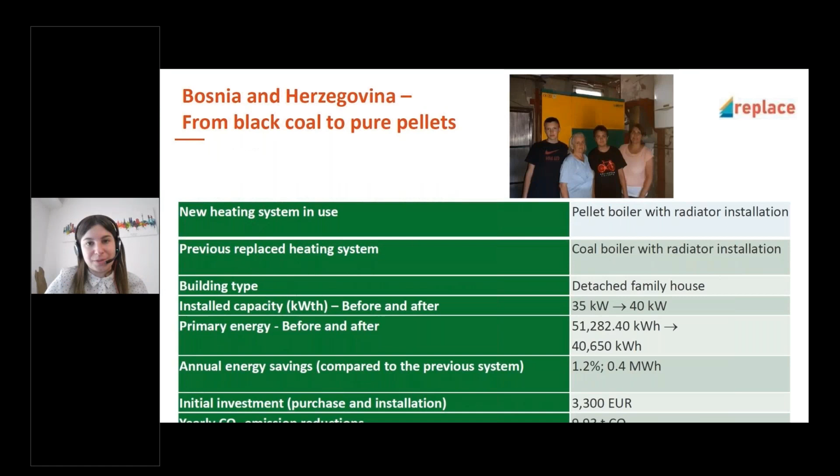Our editorial work is organized around a topic of the month, which allows us to dig deeper into specific themes. Each month, several items are produced by Build Up, such as overview and technical articles, written interviews, and much more. Build Up also offers the opportunity to host webinars on topics related to energy efficiency in buildings. More recently, Build Up has opened its doors to distinguished experts in the field to share their knowledge in front of our cameras in our Build Up expert talks.

The Build Up portal shares daily the most relevant events in the field of energy efficiency, but we also participate actively in many European events around the year, such as EPB Center and REHVA conferences, Horizon 2020, Interreg and Cost Action events, Covenant of Mayors, and more, always with the aim of further disseminating the results and helping to create high-quality media content. The Build Up portal is updated daily, reaching around 120 new items each month, including news, events, publications, articles, and video content.

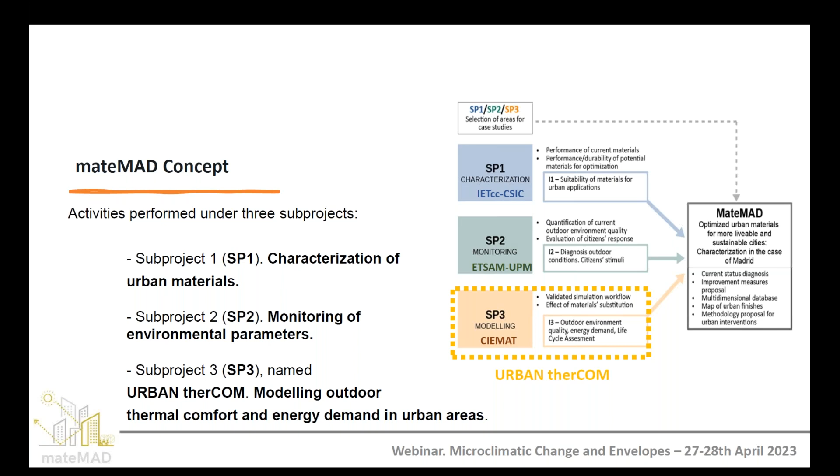They are leading the monitoring of the environmental parameters. And then the last one, the one that I lead, Urban therCOM, is related to the modeling part of the project. The project activities are divided into 5 big steps.

The first step is related to the assessment of vulnerability within the city of Madrid, related to topics related to climate change. The second step is related to characterization of thermo-optical properties of different kinds of material, both in situ and in laboratory. The third step is related to the monitoring of the case study that we chose.

The fourth one is related to the modeling strategy to be able to model and simulate both indoor and outdoor comfort. The last step is related to optimization of the results, and in this we want to use life cycle assessment methodology, and this part is also led by CIEMAT.

At this point of the project, related to the simulation part, we have already chosen our case studies within Madrid based on the energy poverty index, urban heat island intensity, and the morphology of the cities. The first part related to vulnerability within the city is carried out by Instituto Eduardo Torroja, and the last part related to morphology was led by CIEMAT using the homogeneous urban zone methodology.

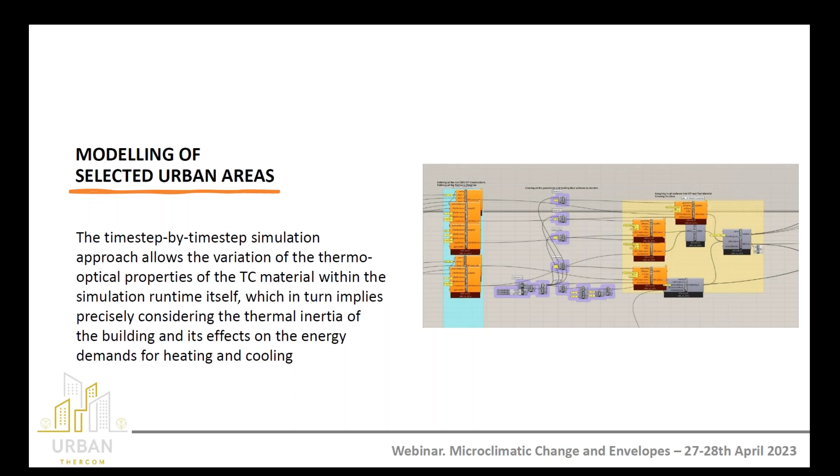Related to the concrete simulation part, we designed a simulation methodology based on a Grasshopper digital workflow. At the moment, we are still at the beginning, and we have only made some simulations related to thermochromic coating in a really simple test room, basically in Madrid, of course.

The further steps are related to the integration of the environmental part, the building part, and the material into a unique workflow. In this sense, we have the help of Emanuele Naboni and his PhD student Marcello Turrini, who are also part of our work team, and they are helping us develop this big digital workflow.

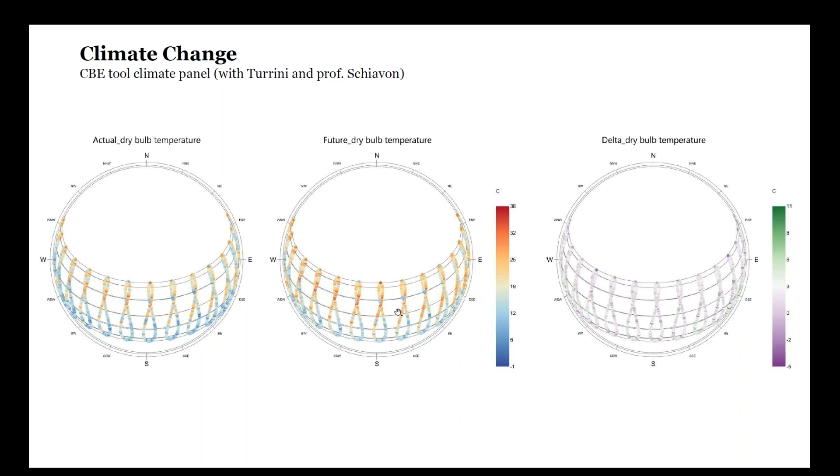Another factor is that the frequency of temperature during the year is changing. This is a chart for the city of Berkeley, where we see that we have a much higher number of occurrences at higher temperature. This means profound changes in terms of microclimate. But also, if we think of an indoor space, this chart exemplifies how there is a shift from an acceptable temperature to a hot temperature, as well as a shift along the year from a hot temperature to a very hot type of temperature.

So this means, in a way, there's a need to design new tension between what happens outdoors and what happens indoors.

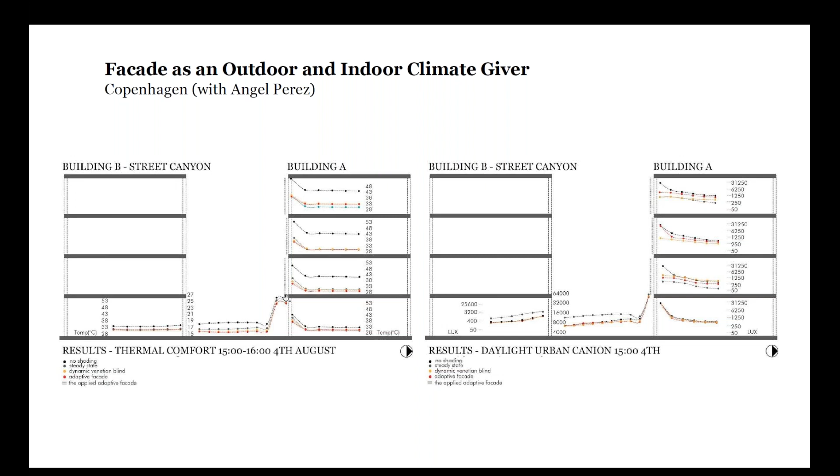With certain designs, we are able to control emissivity and reflectivity, and this is perhaps most of the research I'm conducting now in Sydney with Professor Santamouris. We are able to actually modify conditions at different scales.

Further research showed us that just by changing simple properties of the envelope, we are able to influence indoor-outdoor temperature by up to 4 degrees, if you look at the right chart.

There is a strong emphasis in this workshop, as well as in design, on the computation methods behind it. We have now developed, with some of the presenters, an interesting workflow that allows us to branch all the physical happenings, and it's a very interesting phase.

We are able to assemble different scripts and understand a physical problem, and understand how our design is able to have this double impact on the indoor and the outdoor.

We just finished, along with Emanuela and Marcello Turrini, a workshop of a few days where we had a very interesting group of students, expert students from ICOM and different practitioners from Europe, as well as from different universities.

All of them were then able to design different types of envelopes and understand, almost in real time, the implication on the energy demand for the building, the indoor comfort, as well as the design for the outdoor.

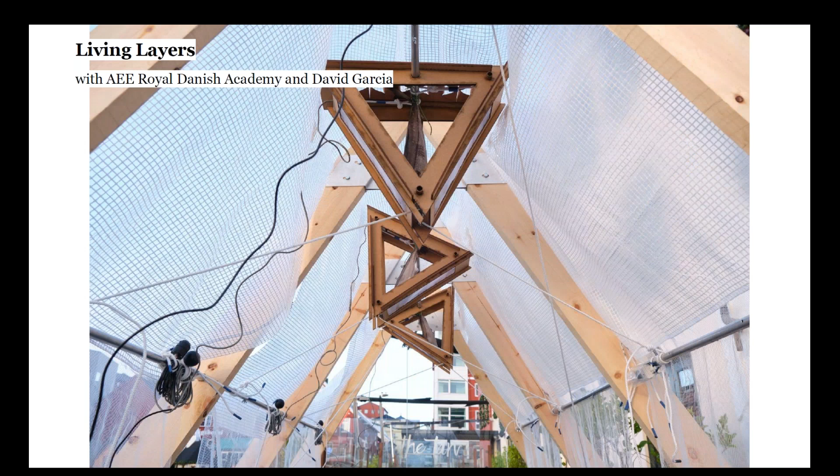Also very interesting is the idea of involved flows related to the culture of a place, like in the Faroe Islands, where together with a student, Jonathan, the idea is to use fish that are drying throughout this facility as an element that modifies the hygroscopic condition within a space.

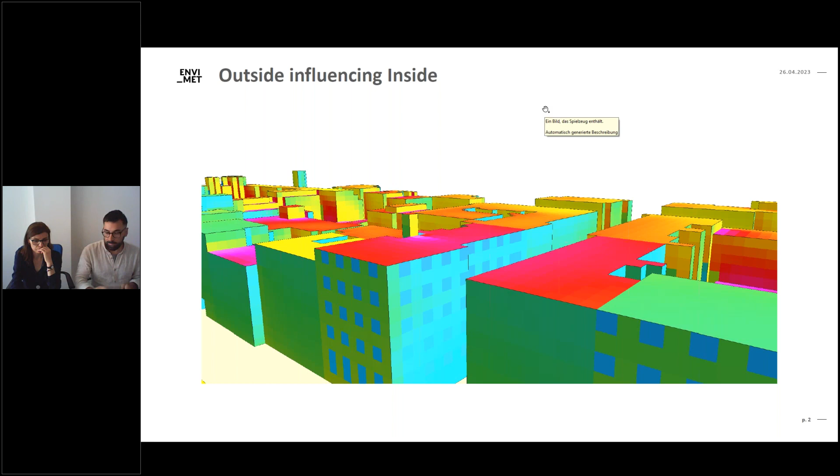So when we think about modeling, we also have to think about the practicality of modeling. It's easy to build a huge model that has everything inside of it, but in the end nobody can use it, or you need a supercomputer to handle that. So that doesn't bring us much benefit except being in a scientific paper research competition.

So I think these things are pretty obvious, and it's just the same principle, just showing the facade elements.

So I picked two other aspects. When we work on projects or think about architecture, we often have the problem of ambiguous spaces, transition spaces. It's not really clear: is it an indoor space or an outdoor space? It has the characteristics of an outdoor space, but at the same time it is largely influenced by building materials or urban elements, for example a football stadium. Inside that stadium, we are somewhere in between an indoor space and an outdoor space.

So to evaluate the microclimate conditions that actually take place, for example inside such a soccer stadium, we have to use both approaches. We have to use approaches from building physics on the one side, and approaches from boundary layer meteorology on the other. The final result will be a mixture between the two. Nobody can say at the beginning what percentage will be indoor characteristics and what percentage outdoor characteristics. And we obviously do not need to say this at the beginning, because we have the possibility to model this.

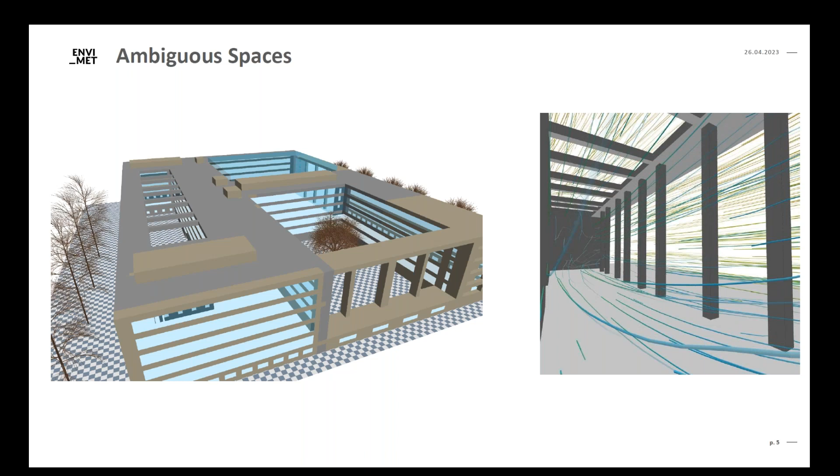Another aspect, which I think is quite crucial and has not been handled very much because it's not really climatology: when we talk about green infrastructure, we talk about the value of properties. It's also the question of what we see from the outside, from inside the building. What is the window view? Green infrastructure is nice if we are outside seeing it, but most of the time, at least in the countries most of us come from, we are inside the building. So green infrastructure also needs to work from the inside view. It's good to know what fraction of green space I see if I look out of my window, especially with classical windows which do not span the complete facade.

So this is also a very interesting analysis point of view, maybe a bit outside the climate aspect, but we are in a holistic approach, so we have to consider everything. We cannot just look at the microclimate. We also have to look at the impact on rainwater drainage, the effect on traffic flows, and so on. To provide a realistic redesign or a realistic idea of climate change mitigation, all these aspects have to be considered. Even though we are climatologists by profession, we cannot just start designing something and then come into the architectural or community process and see it doesn't work because there are trees where cars need to go.

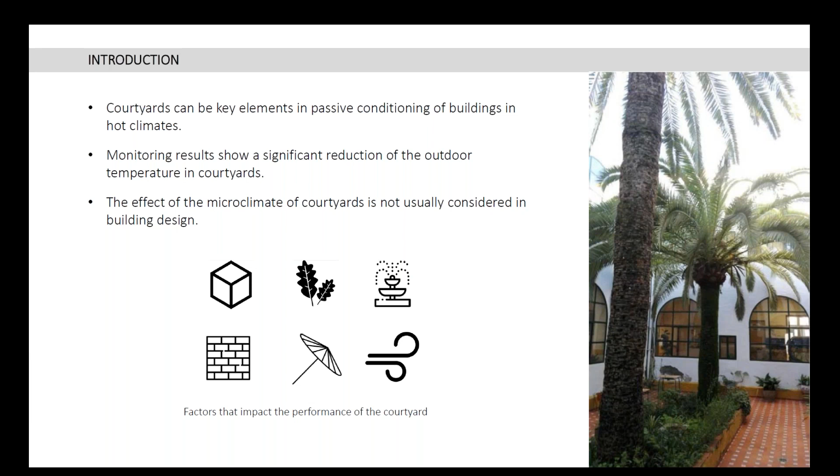We have performed many monitoring campaigns. For example, in this study, we analyzed up to 20 courtyards in the Mediterranean climate in different cities, and all of them achieved a tempering performance. I mean, they were able to have a thermal gap, or the difference between the outdoor temperature and the courtyard temperature, up to 10 degrees. But the performance was different by up to 8.5 degrees between some of them. The best performance was achieved by the deepest courtyard during the day, but during the night they also had some overheating effect.

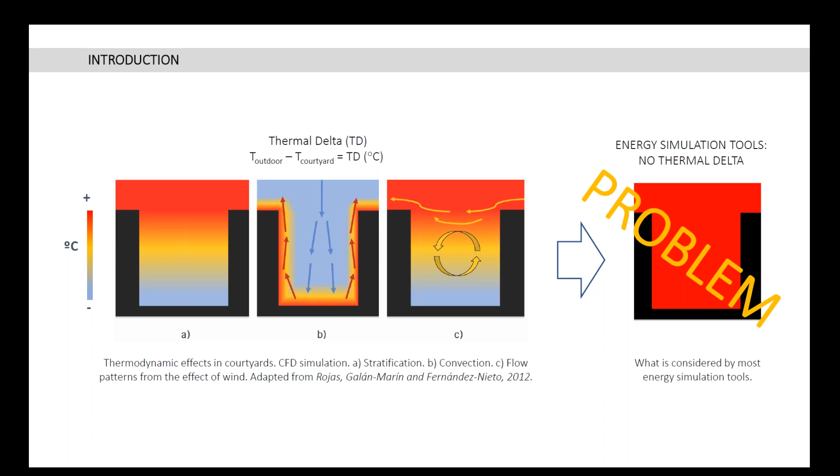However, my PhD thesis was focused on the simulation of these spaces, because we know that the thermodynamic effects inside the courtyard produce this stratification and this lower temperature in the lower levels. But when we simulate them with traditional tools, they consider that the courtyard temperature is the same as outside, and this is not true. And this is a problem because we cannot account for the benefit of these spaces. We performed some simulations and some studies to quantify this effect.

For example, in this one, in collaboration with Jesus Lizana, who is presenting tomorrow too, we simulated a building with a courtyard using different outdoor temperatures: the typical year, the rural weather file, a local climate zone outdoor condition monitored by us, and also considering or not the courtyard. And we found important differences in the number of discomfort hours that we achieved.

If we only consider the local climate zone, there was the highest number of discomfort hours, but considering the courtyard microclimate, we could reduce especially the extreme discomfort hours in an important way. So the consideration of the courtyard is important.

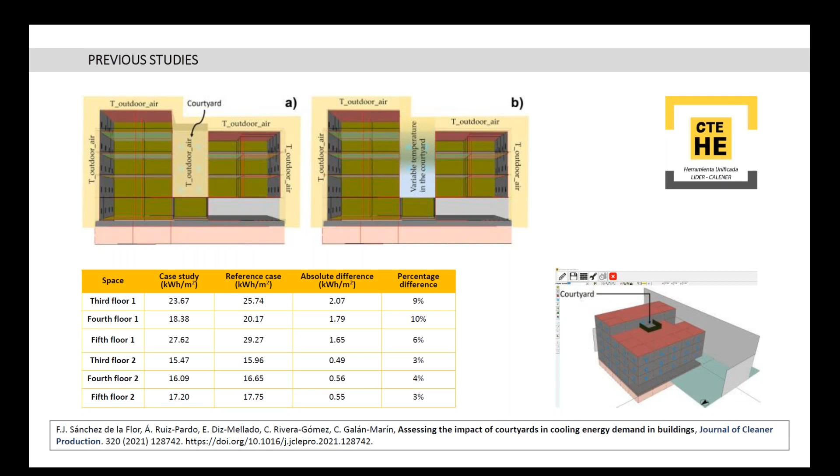This is another study, in this case using the tool that the Spanish government provides for the energy certification of buildings. And we also measured the reduction in the energy demand with a percentage difference up to 10% at the lower levels, where the courtyard has the lowest temperatures.

We also extrapolated the potential of the courtyard at the city scale, using the cooling degree days methodology to quantify the potential of using a shading strategy in courtyards in a city like Cordoba, which is the city with the highest amount of courtyards in Spain, and the reduction could be up to 30% in energy demand in 69% of the urban plots.

But this is all about monitoring, and we want to focus on the simulation of the courtyard. So we have tried different tools in this study. This is an old study from 5 years ago using ENVI-met, and we found that the software was able to simulate the tempering effect, but not with such high accuracy as we would have wanted. I know that with these new releases, probably these results are going to be better.

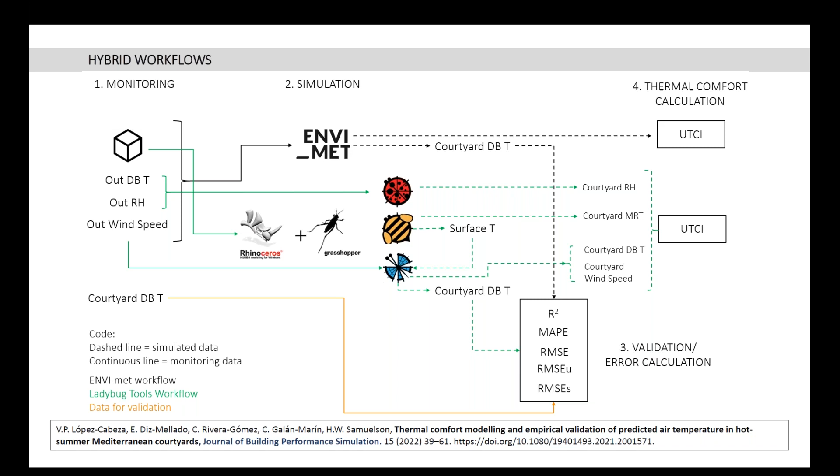But we also tried other hybrid workflows, using the Ladybug tools with the CFD plugin that they have, the Butterfly plugin. And using this workflow, we simulated the performance of different courtyards, and we were able to achieve faster and more accurate results.

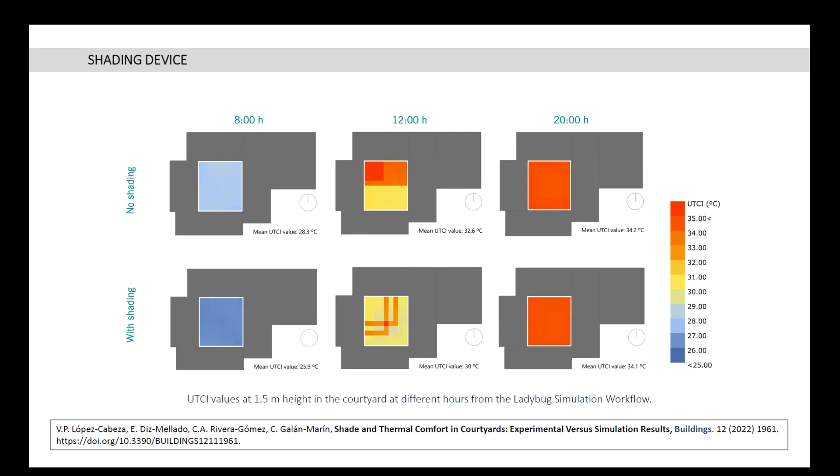Using that workflow, we analyzed different strategies to improve the performance of the courtyard. For example, in this case study, we simulated a courtyard with and without a shading device, and we achieved an important improvement in the UTCI index in the courtyard, especially when the sun was high, with a larger area at lower levels of UTCI.

We also simulated the effect of thermal inertia and ventilation in the Solar Decathlon prototype for the European competition. In this case, we simulated 3 different levels of thermal inertia in the walls, from almost zero inertia with a PVC canvas, which is what was built, and then with 2 traditional walls in the courtyard. And we found that if the courtyard is closed with no ventilation, the higher the thermal inertia, the better the results at the time when the temperature is higher during the day. But during the night, it had an overheating effect.

But if we open the courtyard, the ventilation and the outdoor air that is coming in is evening out the results from all the walls, which means that we can combine thermal inertia with ventilation in order to optimize the results.

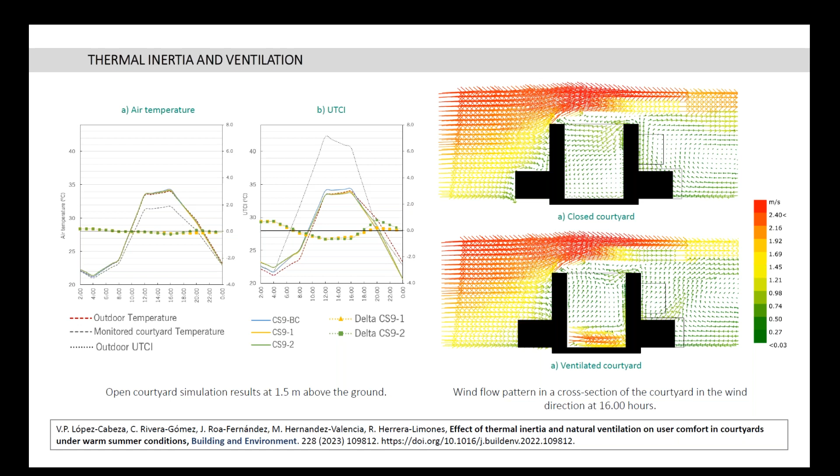Finally, I'm going to show you some coupling tests that we have done using the building energy simulation tool that Spain provides, in order to make this methodology accessible to professionals, with the simulation of the courtyard, coupling the Ladybug workflow with the HULC tool.

This has been done in the Rhinoceros and Grasshopper interface, with some blocks of Python code in order to link first the geometry of the building to be able to export it easily, and then to analyze the climate to find the times when we want to simulate the courtyard, because we need to reduce the CFD simulation time in order to couple one tool with the other.

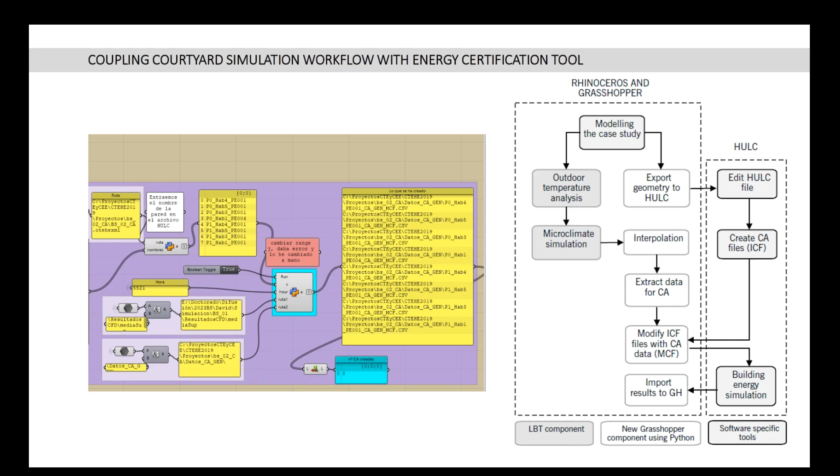And then we simulate the courtyard and we export the courtyard temperature using Python code to generate all the files that the software needs to change the boundary conditions of the elements facing the courtyard. And these are some of the preliminary results of this test, where you can see that the temperature in the rooms facing the courtyard changes a lot when we consider the benefit of the courtyard.

Also, the energy transmitted by the walls and windows facing the courtyard changes in a huge proportion. So just to conclude, we find that the microclimates generated in outdoor spaces of buildings like these courtyards influence in an important way the energy demand and thermal comfort of users. And we need to design and test different simulation workflows in order to account for their benefit.

We are also working on the accessibility of the professional sector to these methodologies in order to promote climate change adaptation of the built environment. And I have shown you some CFD and BES hybrid simulation workflow. We are still working on that, but we could account for or quantify the benefit of the microclimate of the courtyard.

And we have some future works, but Professor Carmen Galan is going to show you later some of the ongoing projects that we already have. Thank you very much. If you have questions, that is my email.

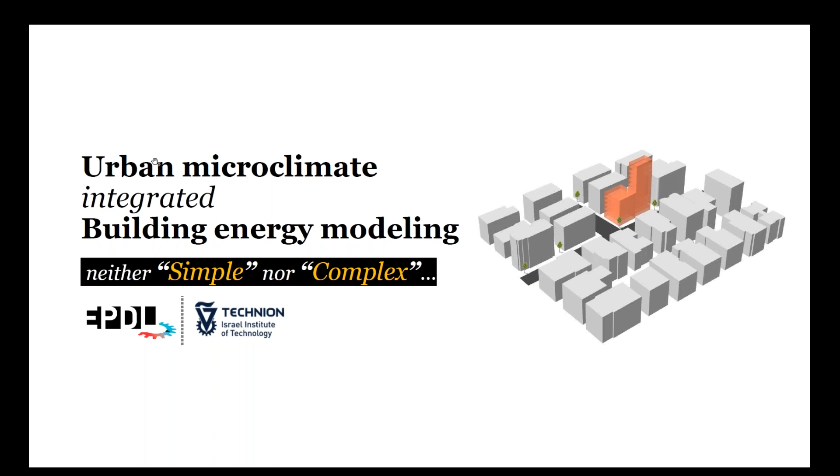Hello everyone, I'm Naga, PhD scholar in the Environmental Performance and Design Lab at Technion Israel Institute of Technology. Since October 2022, I have been working on the topic of Urban Microclimate Integrated Building Energy Modeling, supervised by Professor Jonathan Nathaniel. Today I'm here to discuss my perspective on how integrated simulation is neither simple nor complex with available know-how.

So in this presentation, I would like to answer the questions: why is integrated simulation required? What are the methods available for integration? And how are integration approaches neither simple nor complex?

So we all know that cities have a major stake in world energy consumption, of which 30% accounts for building operational energy use. As most energy generation is fossil fuel reliant, reports on rapid urbanization and global warming are raising concerns about future greenhouse gas emissions.

All thanks to building energy modeling tools that allow designers to make informed decisions pertaining to building geometry, envelope, appliances, equipment, and automation controls that promote energy conservation and renewable energy generation without compromising visual and thermal comfort criteria, using typical climatic conditions.

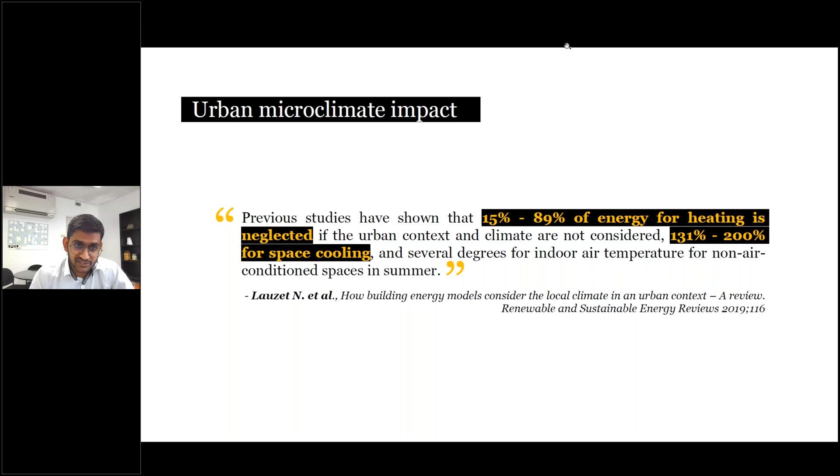After an extensive literature review, we classified integration approaches into two categories based on the microclimate data used for simulation: representative and surface-specific data methods. How do they differ?

In a representative data-based approach, point location or averaged urban microclimate data, generated either from monitoring or from urban climate model simulation, is used to replace data in weather files used for building energy simulation.

But this method raises serious scientific questions, like which point or points of data represent the microclimate surrounding the building. Can the representative data in the weather file help building energy modeling tools account for varying heat flux around the building? To get answers to these questions, we need to take a few steps back and understand the building heat transfer mechanism in an urban context.

We all know that convection, radiation, and discharge are three key modes of heat transfer in buildings. Discharge heat transfer includes air-to-air heat transfer between indoors and outdoors through ventilation and infiltration. According to previous studies, wind speed changes with building and contextual urban form.

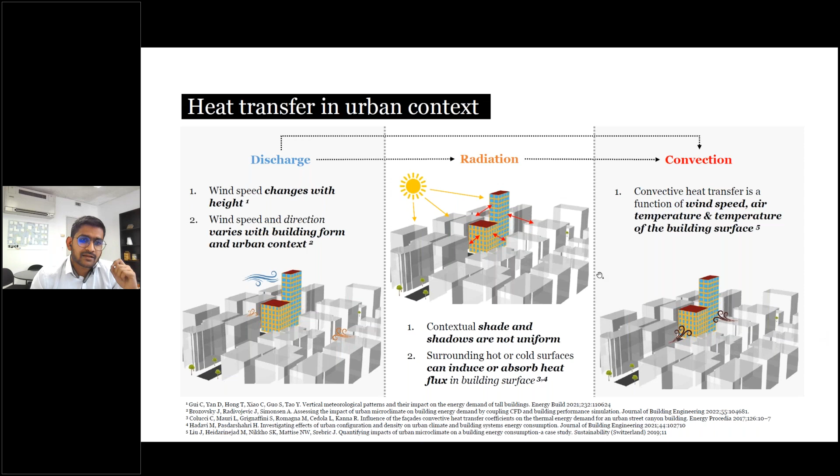Almost all building energy modeling tools that use single weather files for building energy simulations compute heat transfer based on few assumptions. For example, Energy Plus accounts for long wave radiation exchange by assuming that ground surface temperature is equivalent to air temperature. But the ground may be paved with concrete, bitumen, or grass in an urban context. Now, theoretically speaking, can the surface temperature be equal to air temperature?

In the case of local outdoor air temperature, a constant gradient is used to compute height-wise air temperature from the dry bulb temperature in a typical weather file. Similarly, even wind speed for a specific altitude is extrapolated from a representative climate data point. In an urban environment, a microclimate is highly variable, not just with height, but also based on the point in location, as Professor Bruce has discussed before.

So surface-specific microclimate data makes more scientific sense. Urban climate modeling tools are integrated with building energy modeling tools in various methods, where climate variables and heat transfer coefficients are computed and then transferred to the building energy model at each step of simulation. This kind of integrated co-simulation of urban climate models along with building energy modeling tools is termed coupling or chaining, which Victoria has also discussed in her presentation.

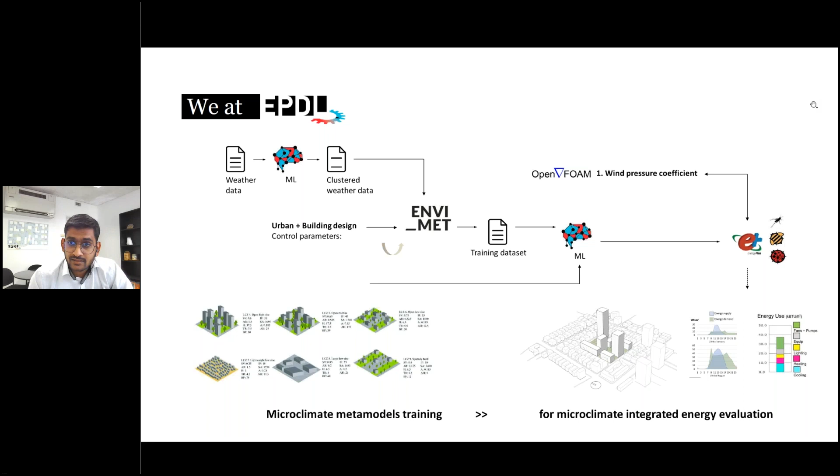Thank you so much, Naga. So we have had a very interesting first session.

To make a resume, Michael and Bruce spoke and introduced the topic, creating this important design tension between climate balance, energy balance, and people's physiological balance. This positive tension was then taken up by Victoria, who discussed specifically how a typical typology such as the courtyard may vary its performance according to geometrical factors as well as envelope factors.

She also discussed how this outdoor room, which is anyway an inner room with respect to the city, is linked to the very indoor space of the building that wraps the courtyard. This tension was said to be understudied, so some of that research that involves the envelope was considered.

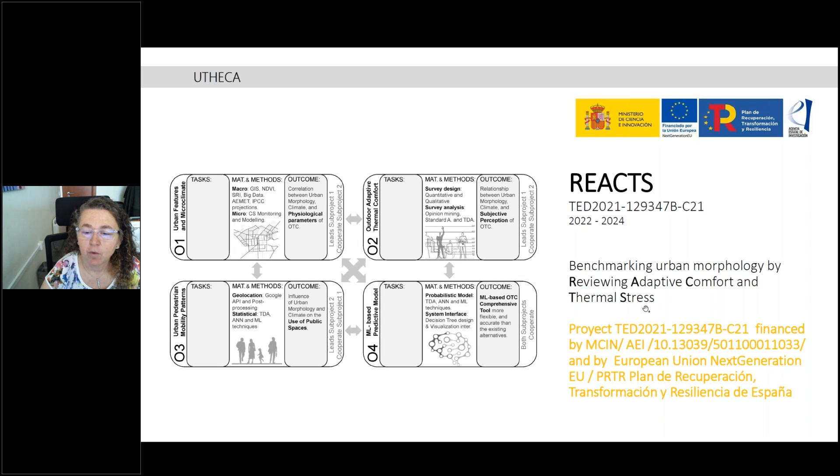Now, in the research group, we are focusing on projects that could address this type of event. The first one, REACTS, is financed by the Ministry of Science in Spain and also by European Union Next Generation funds. It's about benchmarking urban morphology by reviewing adaptive comfort and thermal stress. This project is coordinated with UTHECA, which, as Emanuele explained at the beginning, is a way of doing national projects here in Spain. UTHECA is basically a group of mathematicians from the University of Valencia, developing a machine learning based forecasting model for integrated assessment of thermal resilience using urban thermal comfort algorithms.

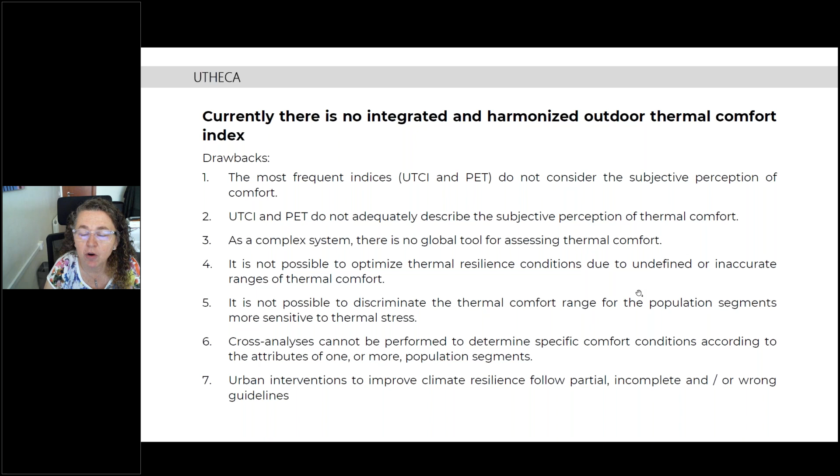The idea is that we do not currently have a harmonized outdoor thermal comfort index, because the most frequent ones do not consider the subjective perception of comfort. So they do not adequately describe users' perception of comfort, because it's a complex system. There is no global tool at the moment to assess thermal comfort, and as a consequence it's not possible to optimize thermal resilience conditions, nor to discriminate thermal comfort ranges for population segments more sensitive to thermal stress. Cross-analysis also cannot be performed to determine specific comfort conditions for one or more population segments. As a result, urban interventions made by architects to improve climate resilience are currently following partial or even wrong guidelines.

So the idea is to join on one side microclimatic components, as already mentioned: solar radiation, mean radiant temperature, air temperature, wind velocity, relative humidity—the ones already included in UTCI or PET—plus urban components like geometry, orientation, albedo, reflectance, and vegetation, and personal components like gender, age, health, expectation, experience, possibility of choice, or even time of exposure, as already mentioned by Michael in the first presentation.

Into an integrated outdoor thermal comfort algorithm that could be shown as a GIS-based integrated visualization tool. So the project aims to improve urban thermal resilience in this context of climate change, developing machine learning-based models that allow accurate prediction of the subjective perception of comfort and the interactions with the climate and built environment, in order to generate better intervention strategies oriented to adaptation and improvement of outdoor public spaces. Also, including sub-project 2, the one with the mathematicians, we will use topological data analysis for all the data input and management, allowing optimization of the model evaluation algorithms.

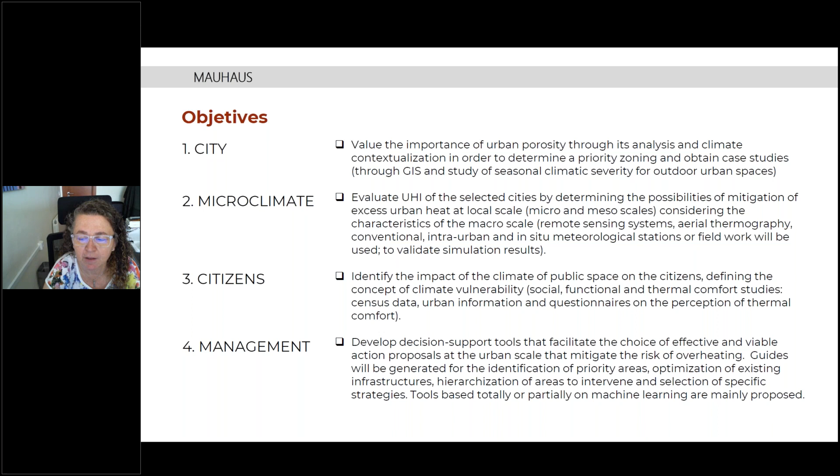On the citizen level, we want to identify the impact of climate on public space on citizens, defining the concept of vulnerability—social, functional, and through thermal comfort studies. At the management level, we want to develop decision support tools that facilitate the choice of effective and viable proposals at urban scale to mitigate the risk of overheating. We will generate guides for identifying priority areas and tools based, totally or at least partially, on machine learning.

So the methodology tries to face all four sides of the problem.

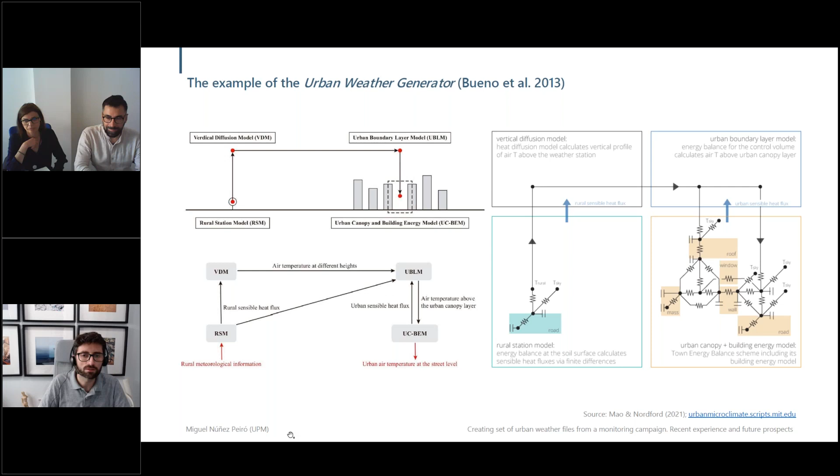Since extending the use of these weather files is critical, we decided to focus on creating a set of weather files representing the whole situation of the municipality of Madrid as a pilot, as a test, in order to check if this process could be replicated in other areas.

Instead of following the modeling approach based on numerical morphing, so instead of focusing on the modeling of the physical phenomena of the environment, we decided to follow empirical morphing. So forgetting somehow about the physical phenomena taking place, forgetting a little bit about the energy balance, etc., and focusing more on the inputs and outputs, on the boundary conditions that we have, and which outputs we were getting in the city, taking advantage of the power we have nowadays with artificial intelligence, with empirical modeling, to pursue that objective of creating weather files.

We focused basically on empirical morphing because we think access to data is increasing. We have not just information collected from the networks we deploy, but also a lot of information anytime, every day, with more accuracy and more definition, both in spatial and temporal scales. We also have much more access to land-based networks. We have improved the provision of metadata to better contextualize the data we collect at urban locations. We also have more information to correctly determine the source area of these measurement points and determine if they are representative of that urban environment, and improved quality assessment and quality controls beyond World Meteorological Organization recommendations, specifically for citizen weather stations.

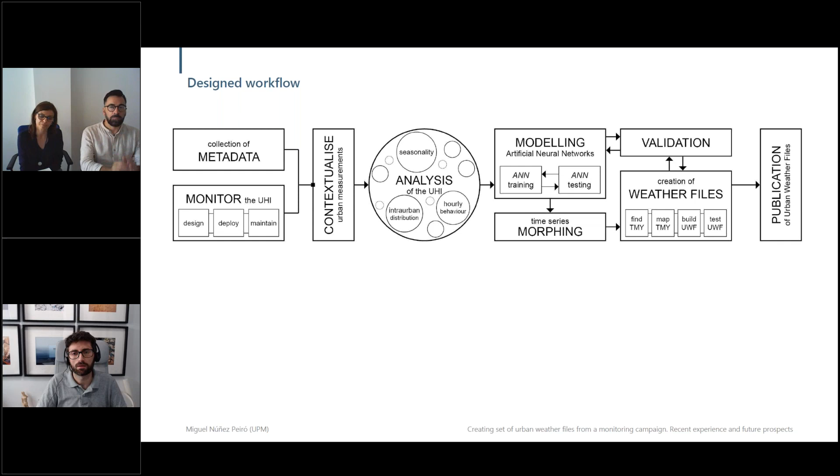So to summarize a little bit what we did: a couple of measurement campaigns. One focused on the spatial distribution of the urban heat island, through which we were able to identify the hotspots and the cold spots in the city. And then, thanks to that, deploy a fixed network of sensors across the city that were measuring and gathering data, temperature and relative humidity data, through a couple of years on an hourly basis.

With that information, analyzing it graphically and of course statistically, we got some insights on the urban heat island of Madrid, confirmed some of the previous trends that were highlighted by other colleagues, and also highlighted other patterns that we found out, such as the absence of a strong seasonality on the maximum and minimum daily intensities, and with that information, carried out the modeling of the conditions for each one of the measuring points.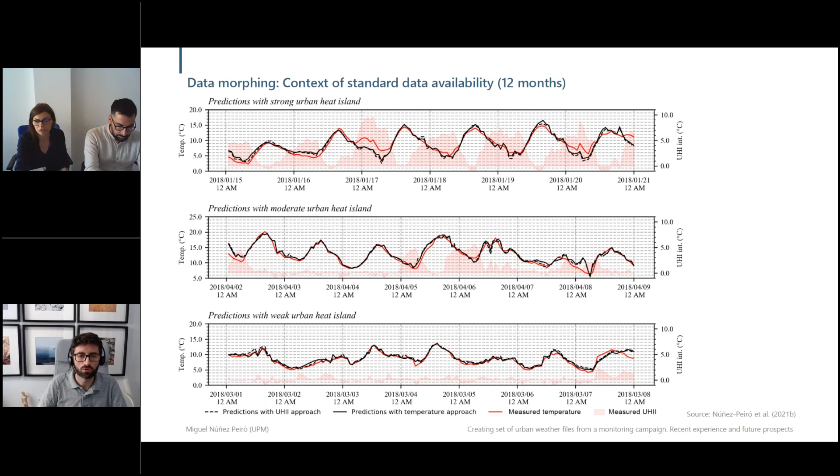So as I was saying, the idea was to morph the data. Here at the lower level, you can see that we got at the end a 10-year data set for each one of the urban stations that we had, and about 8.5 years came from this modeling approach. So at the end, we had an artificial time series of temperature and relative humidity that we could combine with complementary data coming from an official weather station located outside, and then extract from that time series the typical meteorological year following one of the procedures that we have available, in this case, the ISO standard 15927.

The result at the end was this one. We got to cluster the city of Madrid in different urban climatic zones, so to say, that we designed with the cooling degrees and the heating degrees distribution in the urban area, somehow similar to how the climatic zones are created at the national scale here in Spain, for example. The different climatic zones that we have are highly corresponding with the heating and cooling degree days.

And in a similar way as well, we created a set of weather files organized with these two axes, increasing in winter severity with the letters and increasing in summer severity with the numbers that you see here, in a very similar way as the technical code here in Spain, for example, does. The results that we obtained from this.

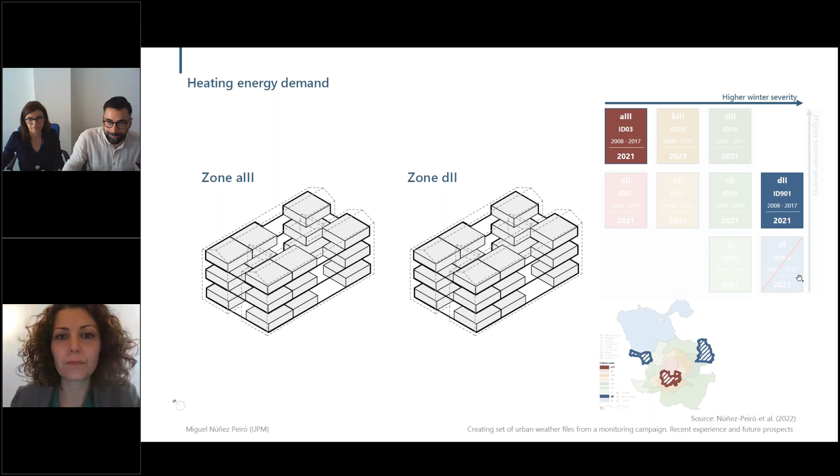So my short speech will be on the impact of reflective materials on outdoor and indoor microclimates, that I think is quite related to the topic of the European project and this session. So, sorry. Briefly, who am I?

I'm currently a lecturer at the Department of Architectural Technology at Polytechnic University of Catalonia, the School of Architecture. But I worked before in the UK at Brunel University, London, and I carried out a joint PhD program between Sapienza University in Rome and UPC. My PhD thesis dealt with the interrelationships between urban morphology, heat island intensity, and building energy use, basically in the Mediterranean context. So I analyzed Rome and Barcelona.

But I thought that for this webinar, it was interesting to present some results of another project I carried out in the UK at Brunel University, and the project was urban albedo computation in high latitude locations, an experimental approach. And the aim was to assess the impact of urban morphology and materials properties, more specifically solar reflectance, on overall urban albedo of urban textures, and how these affect outdoor thermal comfort and also building overheating risks, so outdoor and indoor impacts.

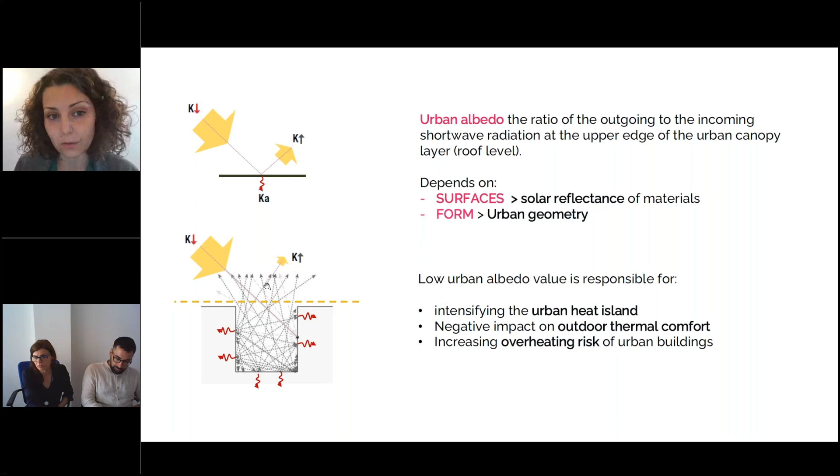Okay, and so the urban albedo is defined as the ratio of the outgoing to the incoming shortwave radiation at the upper edge of the urban canopy layer. So we analyze what happened in the urban canyon, so how the reflectances of facades and roads basically contribute to reflect solar radiation out of the canyons. And this, of course, involves both the property of the surfaces, roads and facades, but also the form, so the canyon geometry. And this is important because we know that lower values of urban albedo have impact on the heat island effect, outdoor thermal comfort, and indoor thermal comfort or overheating risk.

My specific task in this project was the modeling task, and so an assessment of different scenarios with varying values of solar reflectances of facades and roads, and the impact on indoor operative temperatures and outdoor mean radiant temperature, air temperature, so the variables that affect outdoor thermal comfort. The project also involved Kent University and Loughborough University, so we also had a measurement on a physical model that you can see in the central picture, and in situ measurement in a residential area of London, along with this microclimate simulation and building performance simulation.

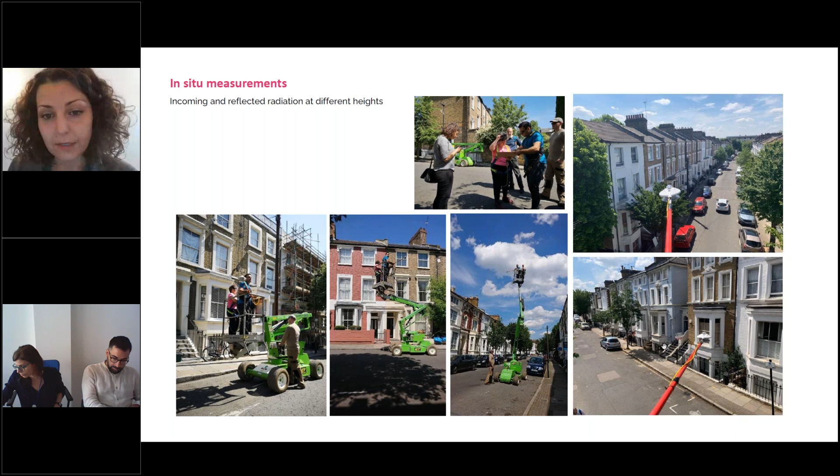So very quickly, in the in situ measurement, we tried to understand what was the actual variation of urban albedo of urban canyons in a residential area of London, taking measurements at different heights in the urban canyon. And the scale model was a big model, a 1 to 10 scale model, in which we measured the impact of actual materials, so bricks, different kinds of paintings, curtain walls, or concrete pavings and grass, and how these materials affected the reflected radiation out of the canyon, always at the roof level.

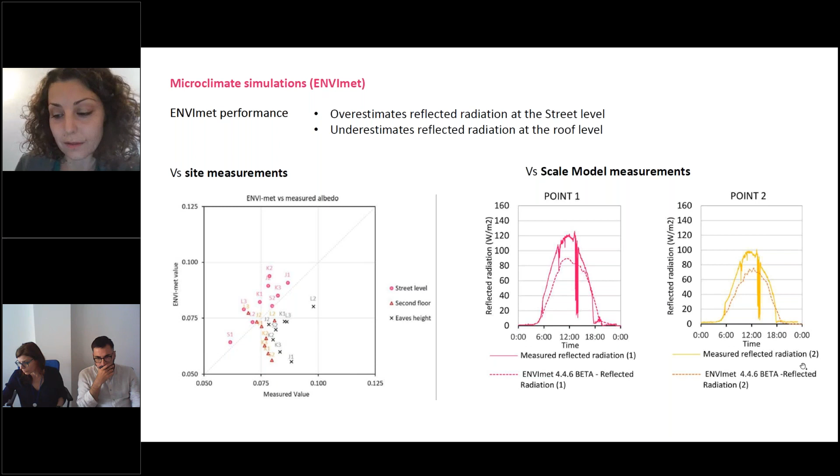So quickly, some results investigated using ENVI-met of changing the reflectance of facades and roads. Well, this is a representation of calibration of the ENVI-met model. So we compared the measurement with ENVI-met predictions, and we found that the performance is good, except that probably there was an overestimation of the reflected radiation at the street level compared to the measurement we took in London. But the overall performance was good.

So what was then the activity? To compare different scenarios, changing the facade at the lower part, at the upper part, and the road reflectivity. The scenario that mostly impacts urban albedo is changing road reflectivity. So an increase of the solar reflectance of the road, which is the scenario R05, contributes to increase urban albedo much more than changing the reflectivity of facades, for instance.

On the other hand, this positive contribution to urban albedo of the road reflectivity depends on urban geometry. So the impact is much more evident in, let's say, an urban canyon like the geometry on the left side, so an aspect ratio about 1 or less, while the contribution of the road reflectance to the urban albedo is much reduced in a narrower urban canyon due to urban geometry.

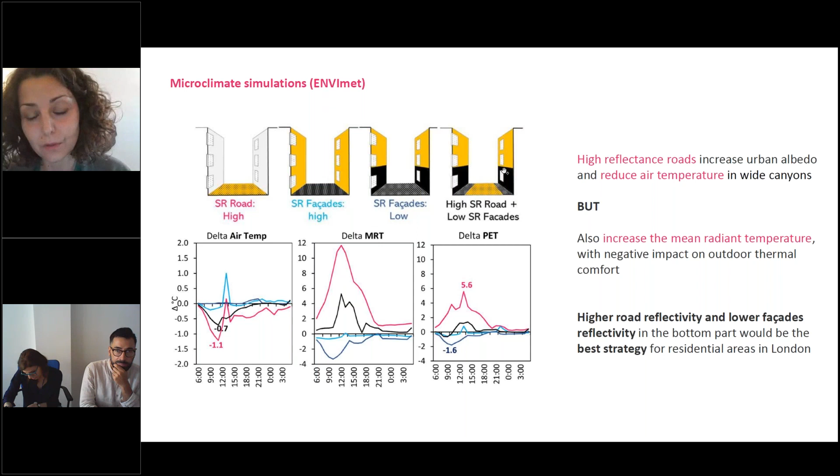And even if solar reflectance of the road has a positive contribution on urban albedo and so on air temperature, there are also negative impacts on outdoor microclimate, like an increase of the mean radiant temperature at the street level. And therefore, if we want to assess the impact on outdoor thermal comfort, probably we would say that it's not advisable to increase the reflectance of the road. And finally, changing the solar reflectance of the road affects the urban albedo, the mean radiant temperature of the street, but also the indoor operative temperature, with a slight negative impact, let's say.

So finally, we wanted to highlight that the space of the urban canyon, the outdoor environment and the indoor environment in street canyons are very much correlated, and we should analyze all these impacts together in order to define the best strategy to improve the resilience toward climate change for the future. It is a problem in London, and of course it will be even more evident in Southern Europe. So these are the main publications related to this project, where there are all the details about method and results.

And I think I finished. This is a very short description of the model, just trying to highlight the most important results. I'm open to questions and to provide more details.

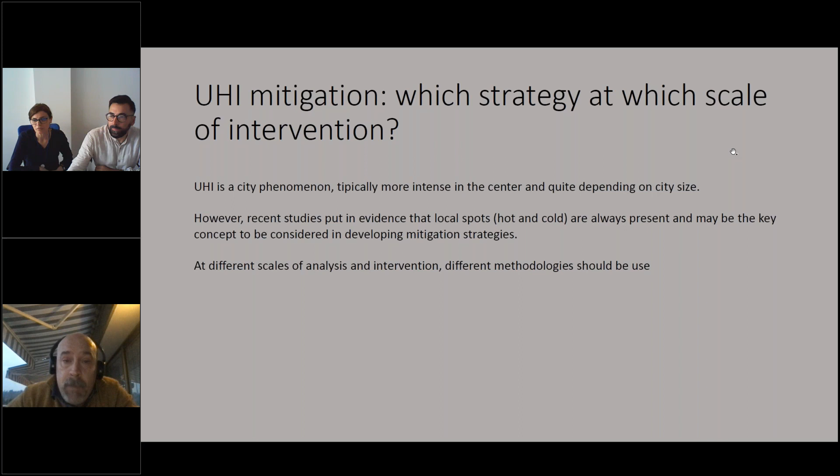In this presentation, I will focus on green roofs as part of the envelope strategies to contain the impact of the urban heat island in the Mediterranean environment of the cities of Barcelona and Valparaíso, and at two very different scales. In the first example, we will focus on the whole city and on some sectors with the most important effect, and in the other case, in Valparaíso, a very local study, by using a different tool.

In the first case, InVEST, that is a tool that works on QGIS, and in the second case, ENVI-met, as part of a graduation thesis of a student in construction engineering. The student analyzed the case of some neighborhoods of Valparaíso. Next.

As a macroclimatic context, both examples are placed in Mediterranean climates. Mediterranean climates can be found all across the world. The original name comes from the Mediterranean Sea basin, but we have very similar climates on the Pacific coast of both North and South America, and in small coastal parts of South Africa and Australia.

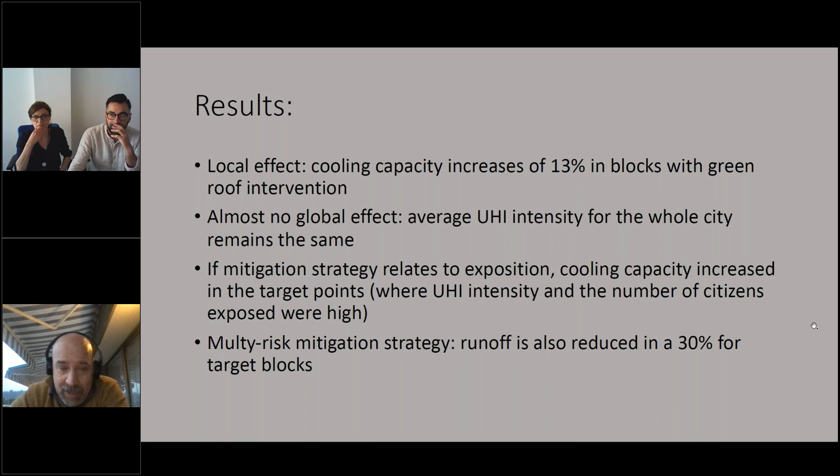There are, of course, some limitations. InVEST is very simple in its calculation. There is only the surface effect—no ventilation, no coastal breeze included, no three-dimensional assessment.

Next, coming to the other example of Valparaiso, Chile. In this case, we selected the places where the urbanized land is more intense, and we modeled some blocks with the ENVI-met tool.

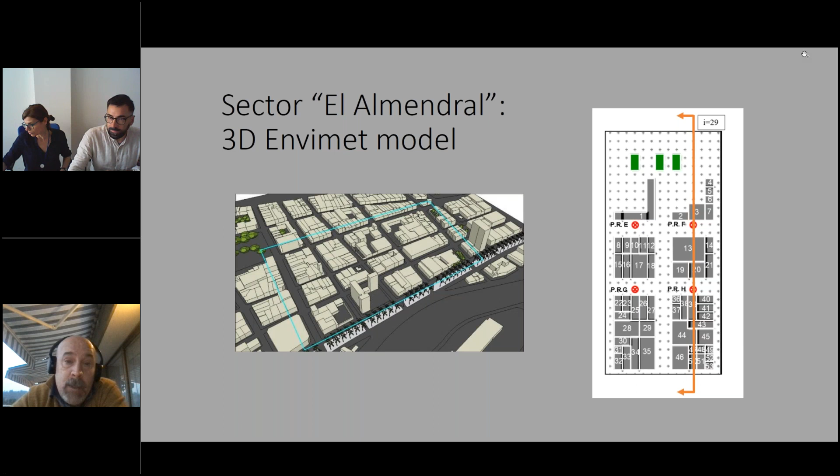The strategy in this case was to check an intervention on all the roof surfaces with 0, 50, or 100% roof intervention. We also changed the albedo and evapotranspiration properties in the model using the same tool, ENVI-met.

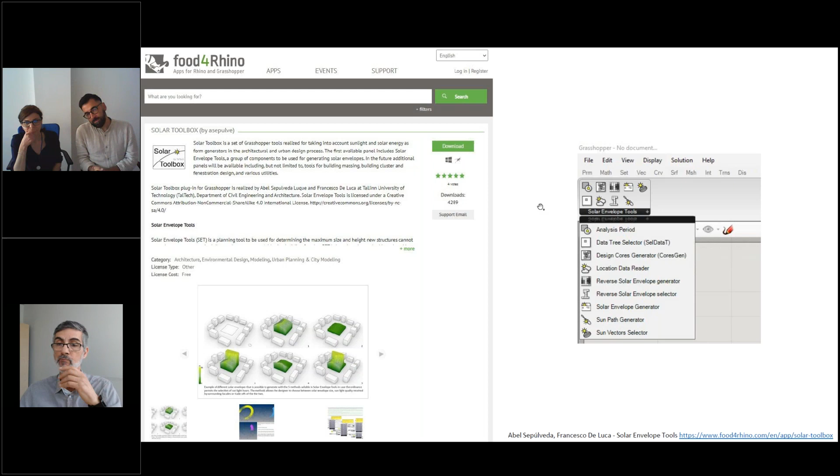This method, the reverse solar envelope, has been included in a tool that we developed for Grasshopper to develop solar envelopes through different methods. Now, the most recent method that I'm presenting today, which we call Urban Shaderade, is an advancement of this method that we have very briefly seen.

At the same time, it is grounded on existing methods for the design of shading devices: the cellular method by Kaftan and Marsh, and the Shaderade method by Sargent, Niemasz, and Reinhart. How do these methods work? They subdivide a hypothetical shape of a shading device into cells, then perform heating and cooling load simulations to evaluate the so-called desirability or undesirability of each cell in relation to the obstruction of the cells when heating and cooling is occurring, thus generating an optimal form for the shading device.

So we applied the same principle to an urban environment to investigate whether it is possible to generate a building form which could decrease the energy use of surrounding premises, thus having a positive effect on the existing built environment. Again, here we are using a maximum buildable volume subdivided into three-dimensional cells, and the assumption is that a cell blocking beam solar radiation during a certain hour would reduce cooling energy if present, or would increase heating energy if present...

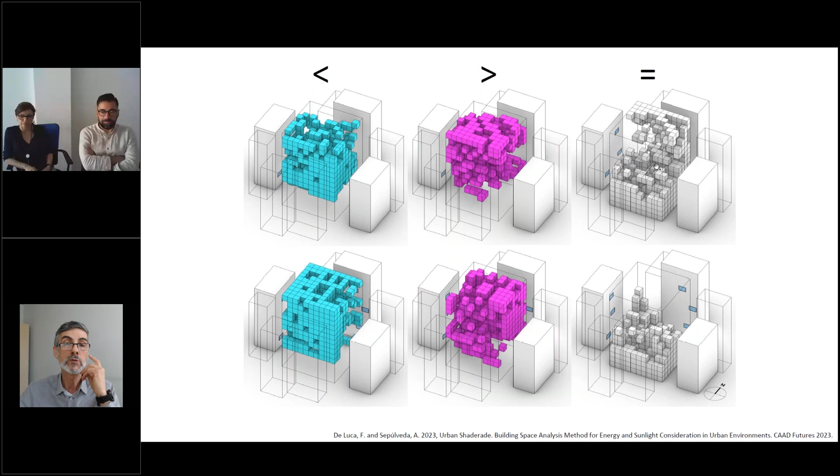To test the method, we generated a parametric workflow, since we wanted to generate a large number of urban scenario variations. We tested the method in 3 cities at 3 different latitudes with different climates: Tallinn, Paris, and Athens. And in 3 different urban environments, we considered building use as office and residential, which make very different use of cooling, heating, and electric lighting energy. We also considered 3 window-to-wall ratios for the test room.

At the end, when we consider the cells with positive or neutral effect, we tested these cells against the sunlight exposure requirement of the current European daylight standard. In this diagram, the white cells are those that have a positive and neutral effect, and at the same time guarantee the required sunlight exposure as required by the minimum requirement of the European daylight standard. At the end, we generated what we call an energy solar envelope, or a conceptual building mass, which is supposed to have a positive effect on reducing the energy use of the surrounding premises.

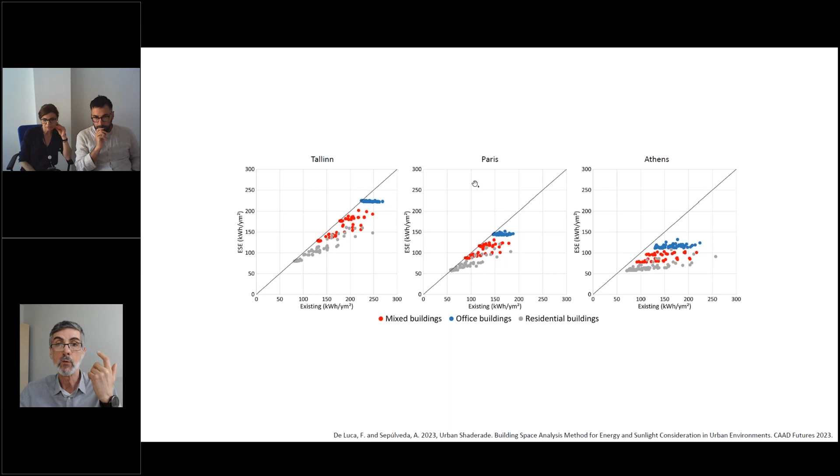Moving on, the main question would be: how do we use this energy solar envelope to design conventional buildings? Actually, this is a sort of next step of the research. Even though there are examples of high-end buildings using this type of pixelated building form, if we want to make this method available as a tool for designers, we have to improve the usability, among other things. So future work is exactly to improve the usability and constructability of the conceptual building mass.

The first idea, though we still have to start working on this, is to use larger cells. The cells we have seen have the size of one floor-to-floor height, about 3.5 meters. We believe that if we consider larger cells, like the same size as 3 or more floors, it would be easier to realize more constructible building mass. It would also be interesting to give the possibility...

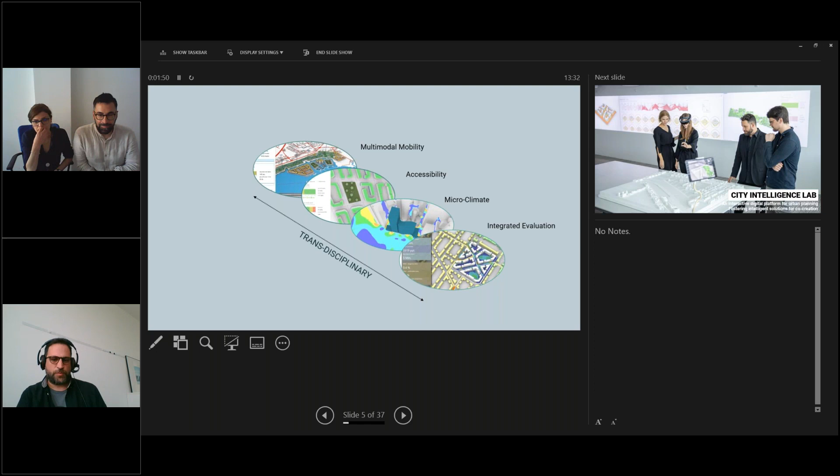Within our unit we have different expertise. We work across different scales, from the regional to the block level, and across different disciplines, from mobility to microclimate and accessibility. So just a couple of words on where we are, to give you an idea.

All of this comes together in the City Intelligence Lab, which I'm heading. It's a laboratory that aims to integrate all the different expertise, analysis, and simulations, because holistic decisions need different approaches. So what we're trying to do in the CIL is bring together all of these different analyses, climate analysis as well as other analysis for the city, to develop more sustainable plans.

So I'm going to very briefly talk about what we're doing so that I can show what infrared is and why we came up with it.

We work a lot with urban planning. Of course, we work with automated generative planning, and we've partly developed Decoding Spaces alongside Bauhaus University, ETH, and the Future Cities Laboratory.

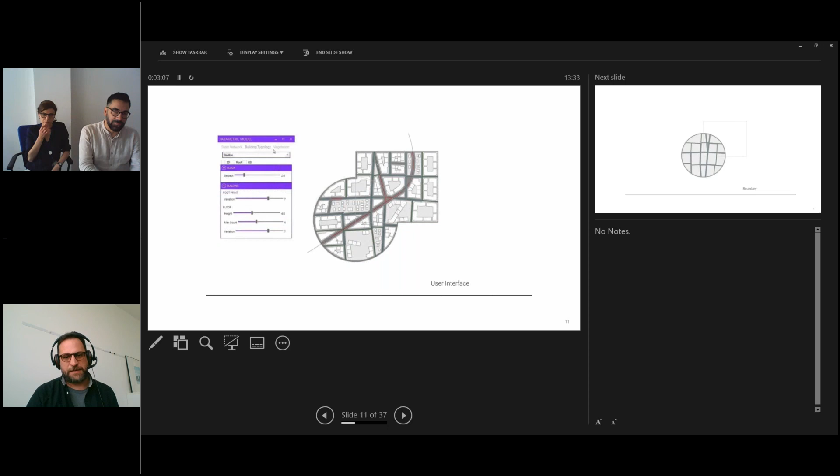Essentially, Decoding Spaces allows you to very quickly sketch urban form, street layouts, or parametric typologies, which we can apply to test different scenarios. This is very relevant to what we're doing on the climate side, as well as to quickly sketch completely new developments in areas that have essentially no planning yet. So it's a very interactive and generative sketching tool for parametric modeling.

We can also do whole master plans by crunching a few numbers, etc. But we're also working a lot with analytics, looking at accessibility and mobility, and how you can access different things in the city.

In this case, looking at isochrones, what you can access within a certain amount of time, and how that affects transport models and transport networks, and how you can optimize transport networks by moving things around. But coming to the climate issue, we've been working a lot on climate simulations here.

This is, for example, a rainfall runoff simulation we've developed in-house for the city of Vienna. You can see how rain falls through the city, identify flooding areas or potential buildings that have resilience needs, like buildings with basements, etc.

The problem with simulation, and this is where I'm getting to, is that it takes a lot of time. One of those simulations might take up to 8 hours to run. That's why we've developed infrared, which is what I'm going to talk about today.

Infrared is essentially an AI-driven simulation prediction framework. It allows you to predict simulation results without really running them. So instead of taking 8 hours, or if we look at the example of wind comfort, which is a little more complex even than rain,

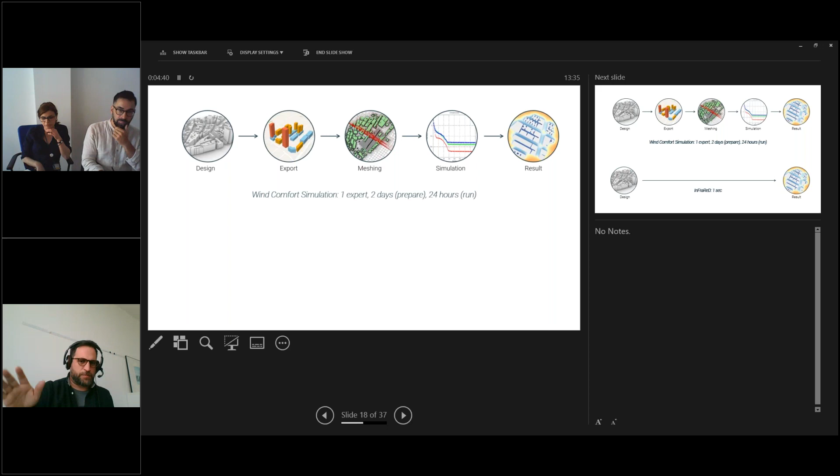you can take up to 3 days to start, prepare, export mesh, or whatever steps you have to do to really get to the result. Then infrared predicts that same result with about 90 to 95% accuracy within a second. That's a really big breakthrough, because it completely changes how you can integrate simulation in design. You can actually get performance right at your hands when you are making decisions.

This is probably the best example, and of course this is done through AI, through deep learning models. You have a solar radiation simulation on one side, and then a simulation prediction. One takes half an hour, the other takes milliseconds, and it shows essentially the potential. To do that, of course, we have to take cities like Vienna or other cities around the world.

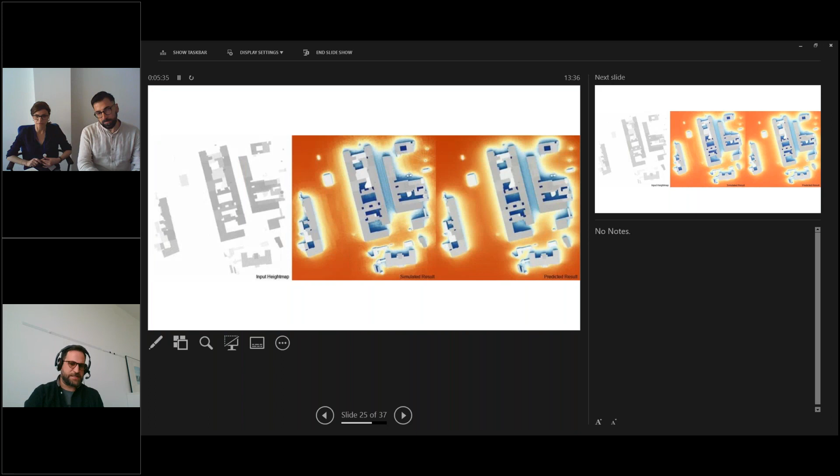We parcel them, we create 3D models, and then we run thousands and thousands of simulations with which we are training our machine learning model. So this is essentially the comparison between the input, the simulation, and the prediction, to show you how different geometries have a different effect. The accuracy can go down to 85%, but it can go up to 95 - 85 is the worst case scenario.

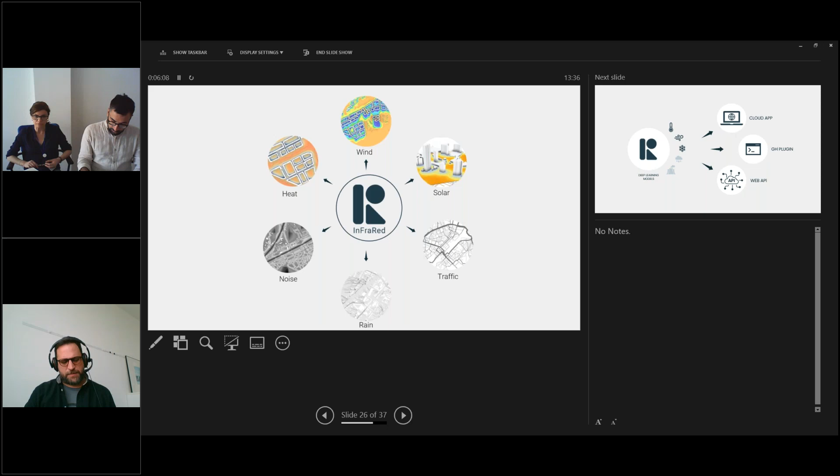We've also used a lot of both synthetic and actual real data to model the parametric models needed to simulate the results. Currently infrared works with 3 different models: heat, essentially solar radiation and sunlight hours, and wind, which is CFD, essentially wind comfort in our case. But we are already trying to do noise, rain, and traffic.

It actually works in a very integrated way. It has both a cloud app where you can go online, design, and get immediate answers. You can have a Grasshopper plugin, or you can also have an API which allows you to directly connect infrared simulations to any other software module that you care about. So that's what infrared looks like when using it in these different ways - whether it's the web app, plugin, or an API. I'm going to go through it in more detail.

I think I'm more or less good on time - I'm 5 minutes now. So this is how the cloud app looks, and I'm going to try to show how it works when you're creating a project. You can type your location, and it essentially gives you an OpenStreetMaps context which you can use in case you don't have any context.

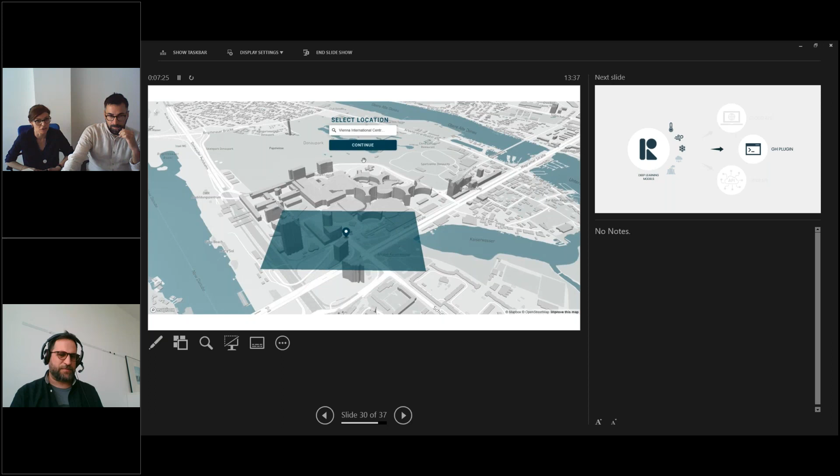In this case, it's the Vienna International Center. Once you have that context, you can create a project and integrate it, and it essentially downloads those very simplified 3D models. But these are good enough for a first step. I'm going to bring in the project very quickly, and then you can start manipulating that context, setting your site or whatever.

But here's the important part: you can add the different analyses you care about - wind comfort, wind speed, solar radiation, and sunlight hours in this case. Then you can start already designing. So I'm going to create a really badly designed building - I'm not really an architect, I'm a failed one. So here's a very bad tower design.

Once I click analyze, you can see how quickly the results come back. There will be results for wind, solar, and sunlight hours, as I said. I'm not skipping that part, just to show you this is the actual time it takes on the web to get the results back. The idea of having wind comfort at your hands in this very direct way changes a little bit how you design with the wind.

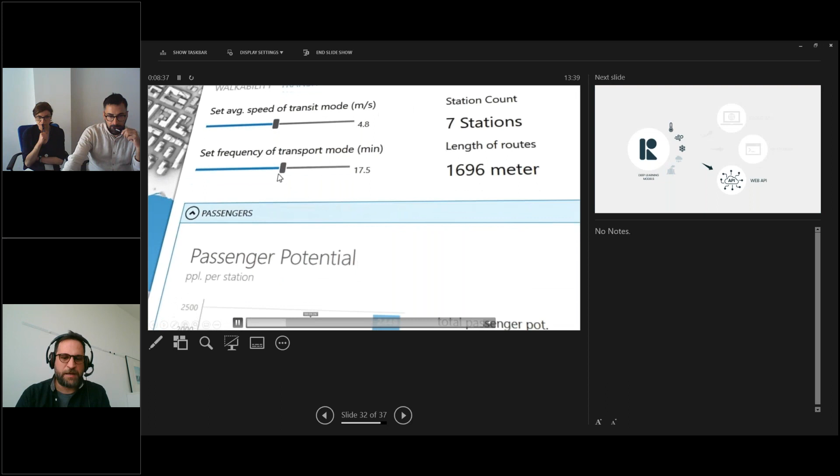Going one step further, if you want to develop something even more complex with infrared, you can do that through the API. This is Giraffe, a web-based urban planning tool developed by colleagues at UNSW and others - this is essentially a company now. You can see how infrared is integrated into a completely different design system, because they've just used the API to directly integrate the simulation results. You could of course do that in any other system.

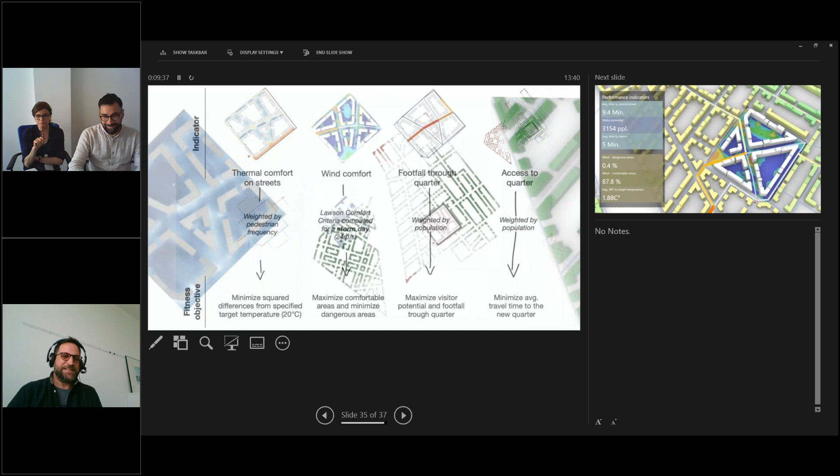Going very quickly to make sure I'm on time - essentially this is what it looks like when you're trying to... I'm going to pause this video for a second. When you have this ability to run simulations so fast, you can run parametric models and generative models that allow you to run thousands of different iterations, but also to test them, evaluate them, and get the performance results.

So here we see one small block, and how essentially we run 1,000 different options on that block. We have all of the simulations together attached to each one of these options, and then you can essentially select the ones that are performing the best and bring them back to the table and continue working with them. So that's really changing a little bit how we design.

We have AI models, apart from the AI simulation models, that help you fine tune your design. In this case, for example, we have a design of a tower, and we want to find out exactly where that tower should be in that quarter. And that is actually done.

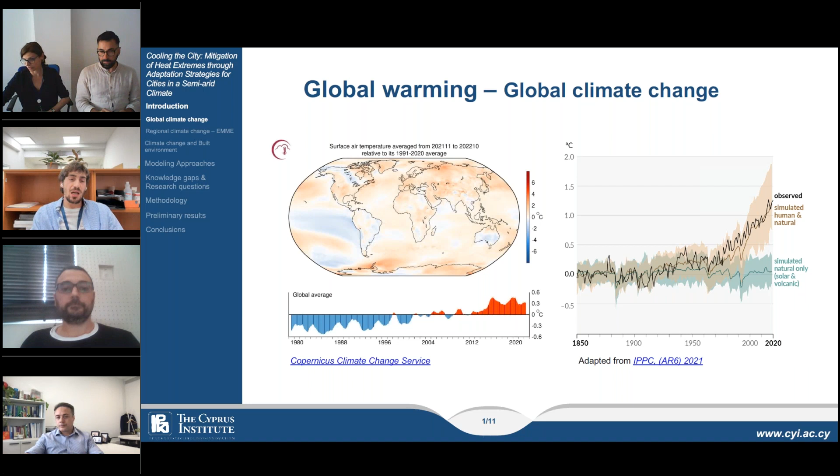But if from a global perspective climate change is a straightforward path, this is not happening from a regional point of view. Because of different geographic characteristics, some regions seem to warm faster than the global average. These areas are defined as climate change hotspots.

In particular, the Eastern Mediterranean and Middle East region is defined as a prominent climate change hotspot because of its particular geographic location at the crossroads of different climates, and because of its diverse meteorological characteristics. The region is very sensitive to changes in large-scale climatic dynamics.

Besides these meteorological and geographical issues, the region is facing other sensitivities like geopolitical or religious problems, as well as robust urbanization and very fast population growth. So here the built environment is a very clear example of land use change, which is one of the problems exacerbating climate change.

The built environment, or urban environment, is a human-made environment for activities, and it can range across different scales from buildings to neighborhoods up to cities. Cities in particular are defined as receptors and drivers of climate change. We all know that cities are usually warmer than their surrounding area because of factors that trap and release heat, and at the same time they lack natural cooling influences.

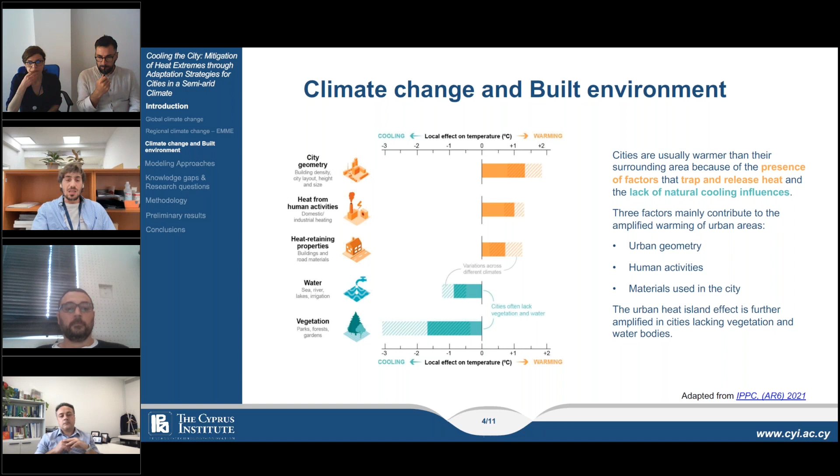Since my research project will try to merge these domains from the city up to the building, I will now show you some of the gaps that I found during these two years of PhD. I found that models at different scales provide a not detailed description of the built environment, and in particular for the Eastern Mediterranean and Middle East region, there is a lack of studies that adopt advanced urban canopy models. At the same time, it's still difficult to identify a tool that considers all the city's fluxes, and the parameterization required by urban canopy models to describe the city is very general.

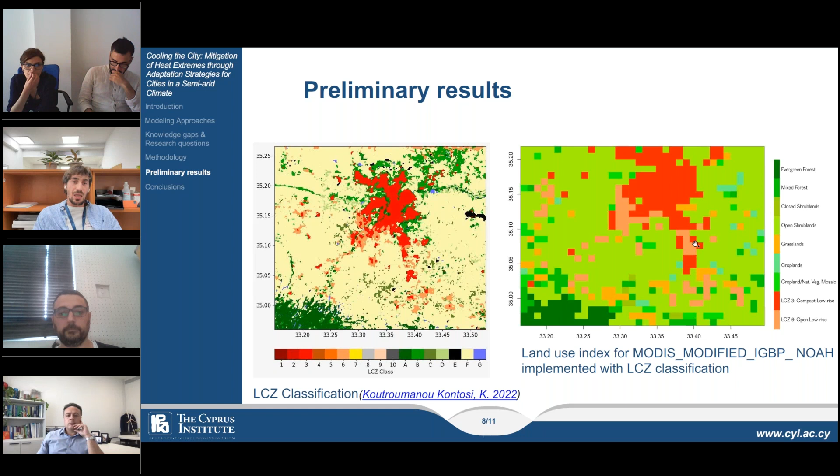And on the right-hand side, I'm showing you the baseline land classification and the implementation of the LCZ classification. And actually you can see how much the built environment representation is improved compared to the previous one. So now moving on to the results, here I'm presenting just some very brief and quick differences between the different schemes in terms of temperature.

So we have BEP minus bulk for the simulation period and BEP plus BEM minus bulk. And as you can see, the BEP has a cooler temperature over the city, while the BEM has higher temperature. And actually this cooler behavior of the BEP is something counterintuitive that will be investigated in much more detail, even though in literature I found some other works that found the same results.

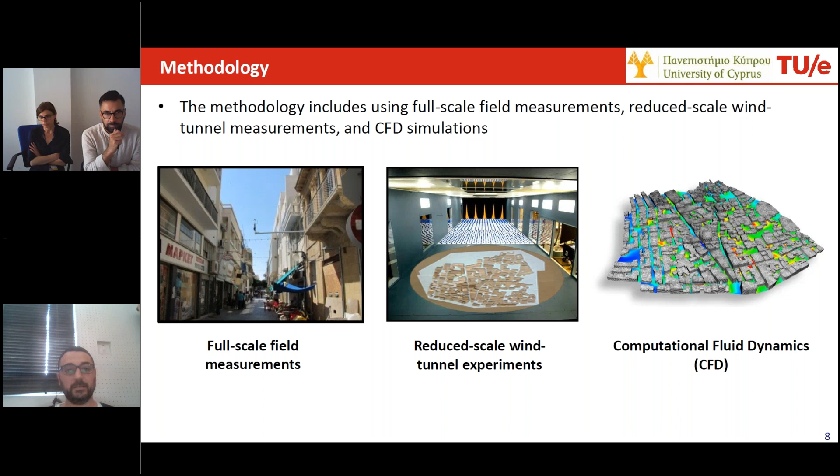So the first part was to conduct field measurements in the case study area. The measurements were of very high resolution and multi-scale. The scales at which the measurements were performed were the regional scale with radio soundings, city scale with 5 different meteorological stations, neighborhood scale with aerial thermography and mobile stations, and street scale with thermocouples and ground-based thermography.

And through these results, we were able to examine the complexity of the urban microclimate in terms of surface temperatures and materials, and we were also able to track specific phenomena that seem to intensify or reduce the intensity of the urban heat island effect, like sea breeze and winds coming from the mountains.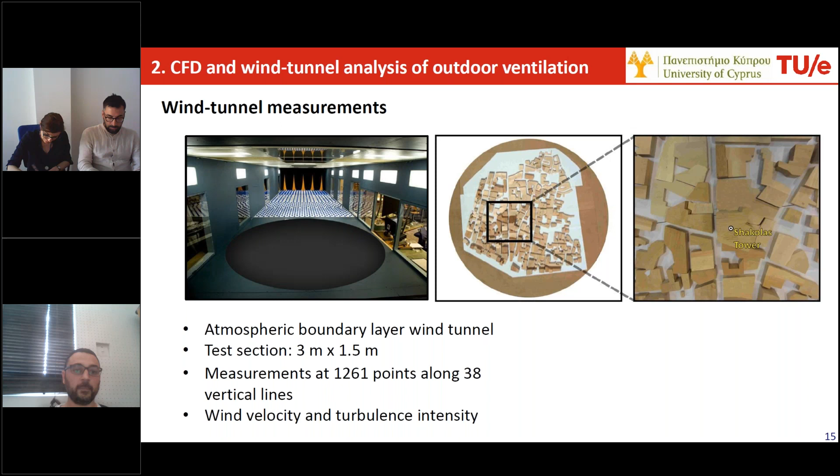And then we developed a CFD model based on the wind tunnel model to assess the performance of the CFD model of predicting urban ventilation by comparing with the wind tunnel results. So results were quite satisfactory, especially for LES. We have compared two different turbulence modeling approaches, LES and RANS. LES is much more expensive in terms of time, but seems to be quite accurate.

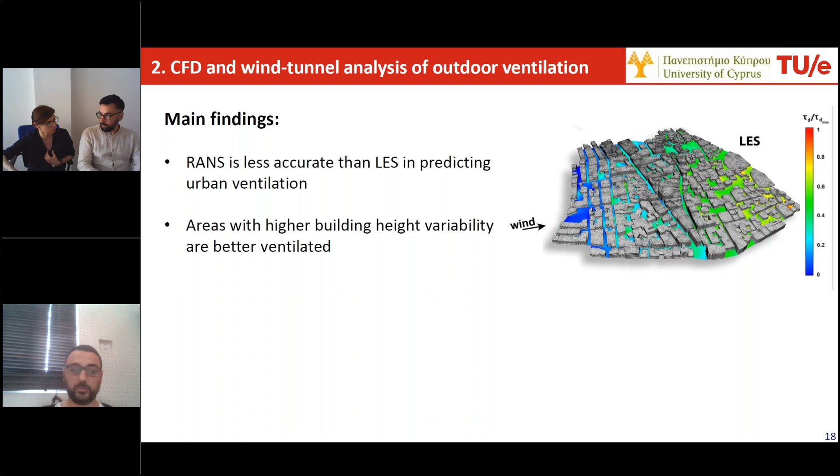So we have also evaluated the different locations of the city in terms of ventilation effectiveness, and building height variability was found to be an important morphological parameter that enhances urban ventilation. So the next part was to use this model to evaluate the urban microclimate in terms of air temperatures, surface temperatures. You can find more details on the reference publication here. And these are the comparisons with the predictions and the measurements. The measurements that we have used are the ones that I described in the first part. So we have used measurements to evaluate the model.

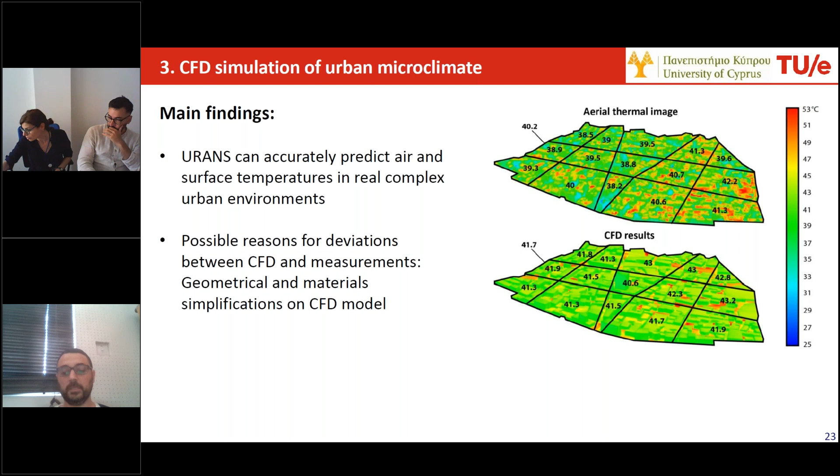This on the top is a thermal image taken from a helicopter. The bottom is the CFD results. You can see that there is quite a good agreement, but we have identified which are the worst agreement in which locations, and the main reasons were the simplifications of the CFD model, vegetation, materials, and so on.

And the last part was to use this model to predict what will be the climate change impact on urban microclimate. So the methodology was to use the field measurements in combination with numerical climate prediction models. We have used the data from the Euro-CORDEX database to have the projections for climate change. And we have used this information as boundary conditions for the CFD simulations of the validated model. And together with radiation modeling, we have used all this information to investigate what will be the impact of climate change on thermal comfort using the UTCI as an indicator.

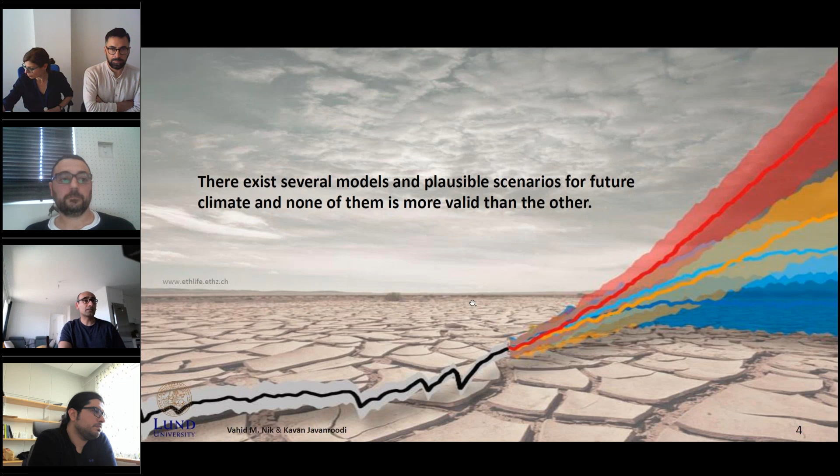So the challenge here is that there are many plausible scenarios. All of them are plausible because all the models that are out are verified models, and there exist several scenarios and many data sets. When we look at the urban scale or cities, we have many buildings, human beings as a big source of uncertainty, different ways of living, and urban infrastructure like energy systems, sewage systems, whatever. So there are lots of interlinked systems in one city affecting the performance of buildings, cities, and energy systems.

So our major focus has been buildings and energy systems. In buildings, for example, we have different systems, different users, different types of buildings. For the energy system, we have different scenarios for energy transition. For example, we want to become greener, decrease the share of non-renewable sources and add more renewable sources, and there can be different scenarios here.

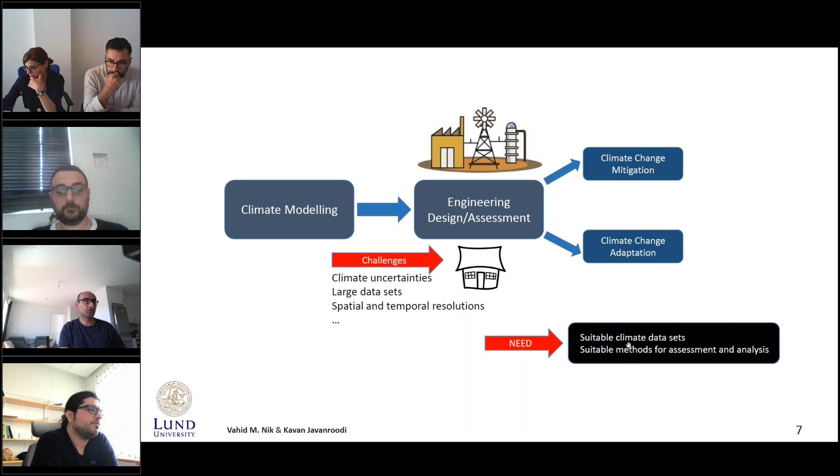So we will have multiple scenarios for climate change, multiple scenarios or conditions for buildings, energy systems, and in general urban conditions together with buildings. And then we want to do this climate change mitigation and adaptation, so we need suitable climate data sets and suitable methods to do the assessment. What we have contributed so far is that we have developed methods to generate representative future climate data sets.

The methods work like this: we consider multiple future climate scenarios from regional climate models, so we have higher resolution, especially temporal resolution. This regional climate data is suitable for our simulations, whereas the data we get from global climate models is not suitable - we need to work on it. So the finest models available at the time are these regional climate models, and we get data from this.

We work with multiple future climate scenarios and then look over into them, depending on the RCP or region or any scenario that we bundle together. Then we generate only three sets of weather data: one is typical, one is extreme - it can be extreme warm, for example - and the other is extreme cold.

And then we have also developed approaches for impact assessment, energy system design, and integrating urban microclimate. These are the references you can take a look at; I'm not going into that.

Concerning integrating future climate scenarios with buildings and energy systems, we published a work in Nature Energy around three years ago, where for the first time we did this direct integration of future climate scenarios into energy system design. So we assess the performance of these designs, taking into consideration extreme climate events. We want to design something that is climate resilient while also being sustainable and decreasing CO2 or other emissions.

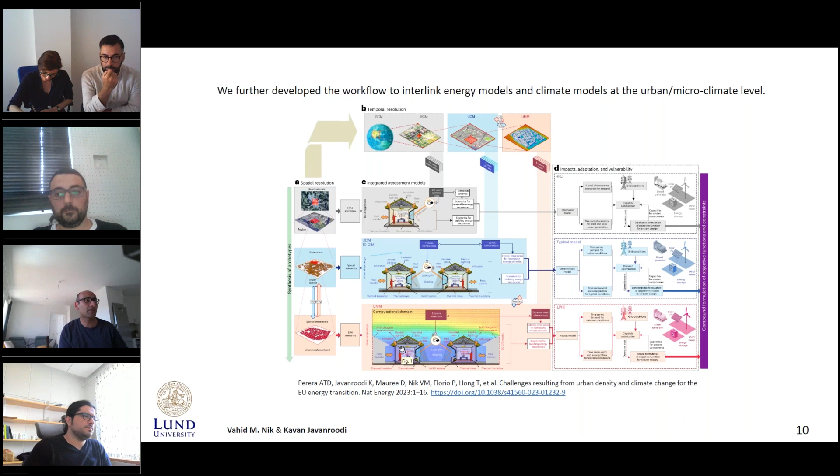So I think from this slide onward, Kavan will talk about it.

Thank you very much, everybody. Right, I hope that you can hear me. Yeah, last time I had a problem.

So I'm Kavan Javanroodi, I'm an assistant professor at Lund University. Just to make it quicker, since I know we don't have time - we're talking about a multi-scale climate model, specifically focused on energy, and of course energy system design and control. That's the focus, and that's the main difference between the literature in actual urban climate studies.

So we're talking about three levels. We call it meso for the data coming from the RCMs, regional climate models. We have the urban climate, which could be defined as studies using, for example, urban energy balance equations. And of course, at the finer spatial resolution, we deal with microclimate studies. So our work has been to assess first the impact of these different levels on the energy demand, and of course on the energy system design and control.

So maybe you can change the slide for that. I cannot do that.

So there's some insight from the recent publication that I showed you in the workflow. For example, we looked at 18 European capital cities to see how different levels could impact energy demand, and of course the performance and cost of infrastructure and grid integration of renewable energy systems across different time scales from 2010 to 2099, also considering urban densification scenarios by 2050.

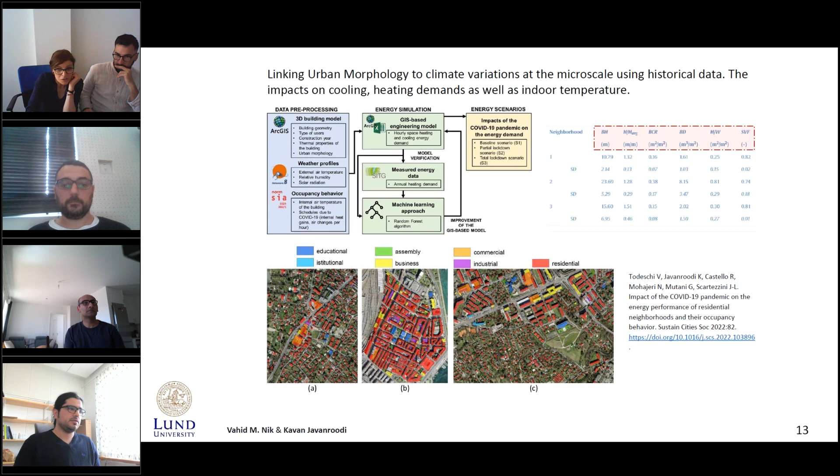So the importance of considering urban morphology, not confined to just urban form, is one part of our study. Maybe just the next slide, the final one please. Thank you, yeah, you can just see that.

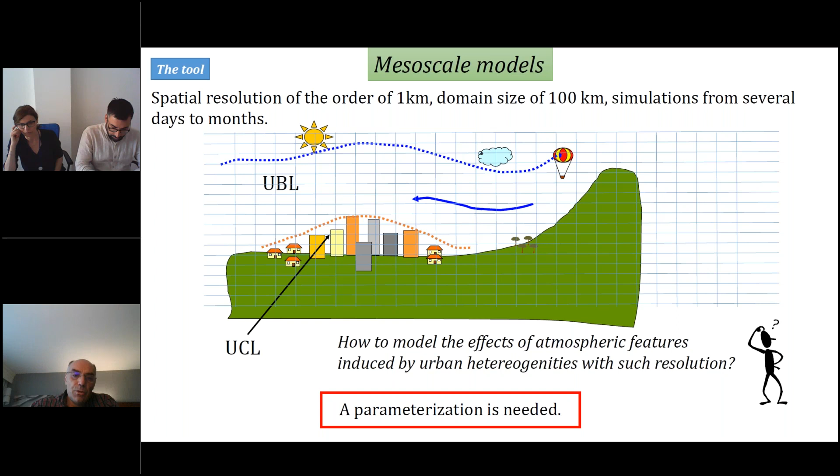It's been about 20 years that new parameterizations of the urban canopy have been proposed for mesoscale models. These are basically all based on one assumption, an idealization of the urban morphology. Since we recognize that we cannot resolve the full complexity of a city, we say the city for us is just a series of canyons. All the canyons have the same width, all the buildings have the same width, and in some cases you can account for the variability of building heights. So this is a strong simplification of the real morphology.

The advantage is that since all the canyons are equal, you can estimate the shadowing in one canyon, the trapping of radiation, and resolve the surface energy budget for each surface, for the road, the walls, and the roof. That's the advantage of this approach.

Several schemes, as I said before, have been proposed. One is the one that I started to develop in my PhD at EPFL in Switzerland almost 20 years ago, and then we continued to improve this at CIEMAT. This scheme, called BEP, has been implemented in WRF, which is the most used mesoscale model in the world.

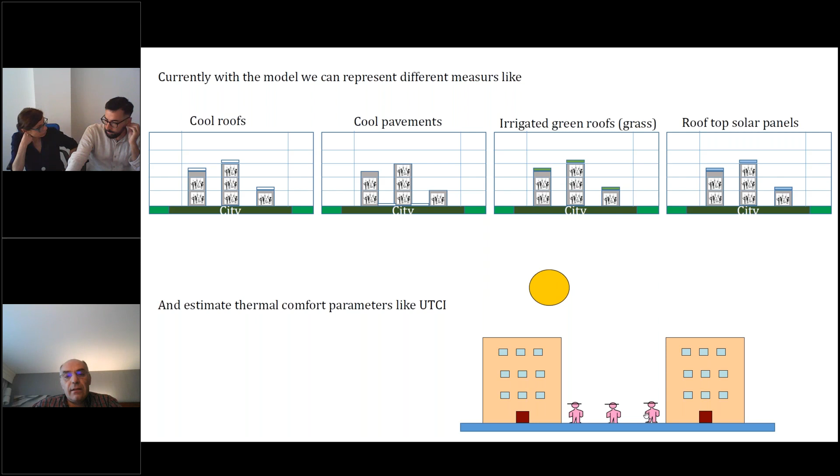I think we need to stop here, but please leave that chart up, the previous one, because you can really... If you can please leave it. Yeah, thank you so much. We will use it to moderate the panel. It's a super interesting example.